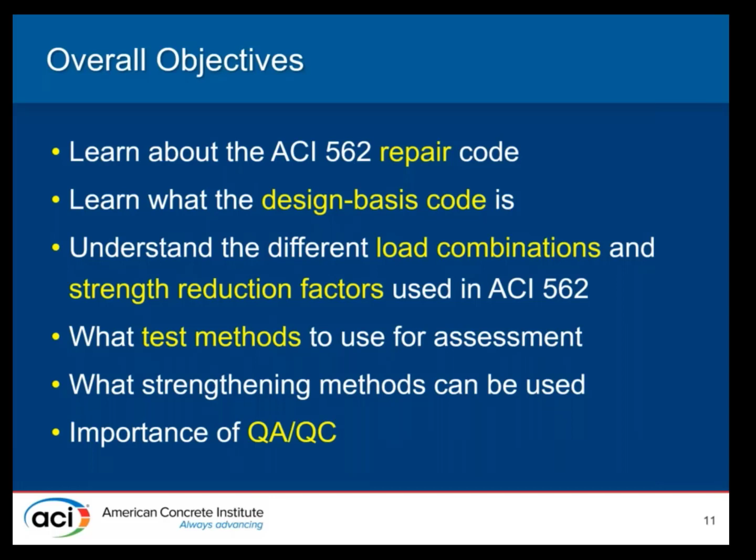As an overall outline, I'm going to focus a lot about the need for a concrete repair code, and talk about how concrete repair methods and different things are being used and what sort of successes we've had. Next, we'll talk about the chapters in ACI 562 and how they're put together. And finally, throughout the presentation, we'll have different examples of different types of repairs that are being completed.

We're going to talk about the history of repair codes - I know nobody was expecting a history lecture, but it's actually interesting how we came to this point. We'll talk about general requirements and some criteria when using those codes. And then, in some of the other modules, we'll talk about preliminary assessment, preliminary evaluation, when that needs to be performed, what material properties will be used during the assessment, what design strength equations and strength reduction factors apply when you're evaluating a structure, and then a key thing: how to ensure the durability of a repair.

We're repairing a structure because it's been a problem. So how do we prevent the problems from occurring in the future? And how do we not just ensure that the repairs are durable, but the repaired structure is durable? The last module goes through some real life examples, taken from the ACI ICRI guide, showing how some of these code requirements are put into practice.

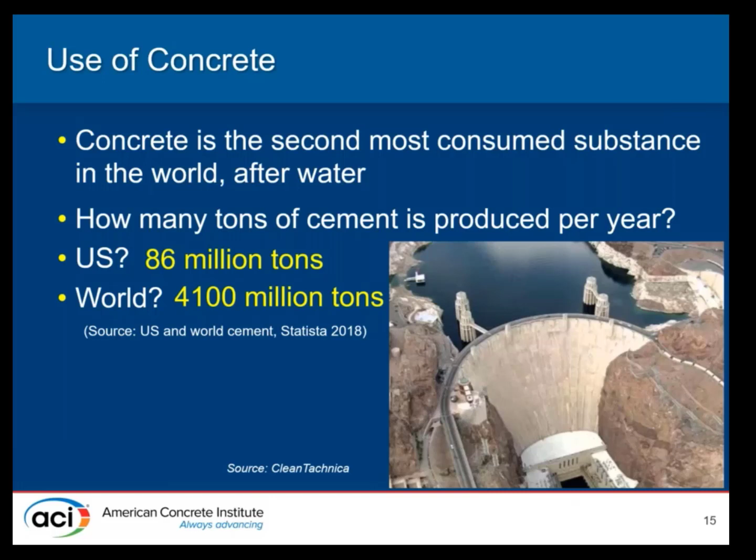How many tons of cement is produced every year? In the US, 86 million tons. That's just the cement. Worldwide, 4,100 million tons, and those are 2018 stats. Everything's gone up since then.

Give you an idea of how much concrete is being produced. And the nice thing about concrete, if we're careful with it, we maintain it, we keep it dry, we keep it happy, how long is it going to last? Thousands of years. And we go back to things like the Pantheon in Rome, some of the aqueducts in Rome. They've been around for thousands of years. There's not too many things that have lasted that long.

So what are advantages of using concrete? And this is like the really cool part when you're a little kid and you start to see that you can make all sorts of shapes out of it. It's fire, weather resistant, and it can be extremely durable.

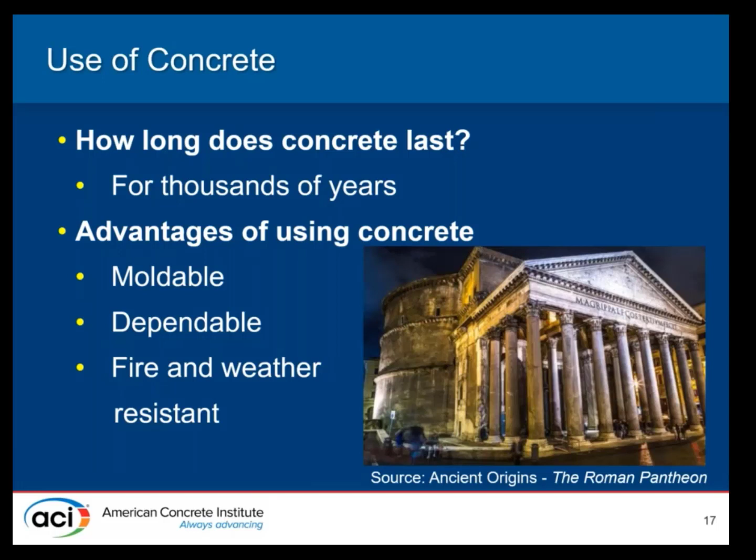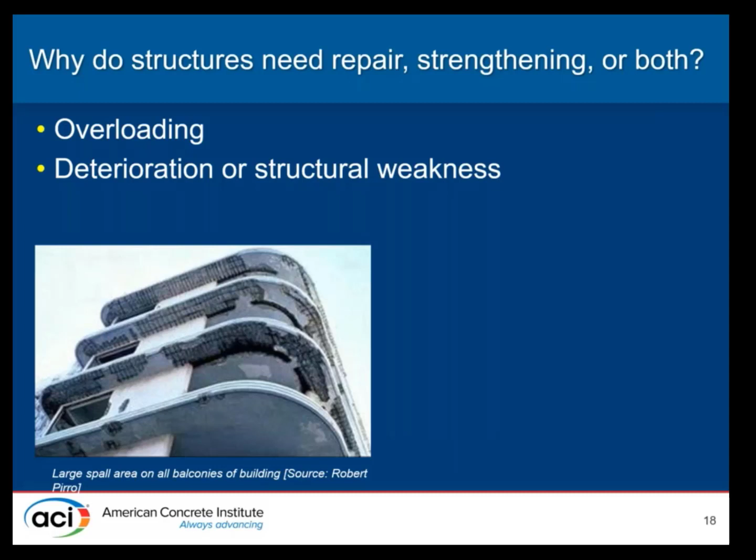You can have deterioration as a result of corrosion, other types of damage, inappropriate materials. You can have defects, inappropriate materials, bad choice of materials, not strong enough, design and construction errors. So repair or strengthening or both may be needed to come from a design error. Let's just say during construction, the contractor doesn't follow the specifications, or the specifications were incorrect. We got some of the wrong material. Maybe it wasn't sufficiently durable.

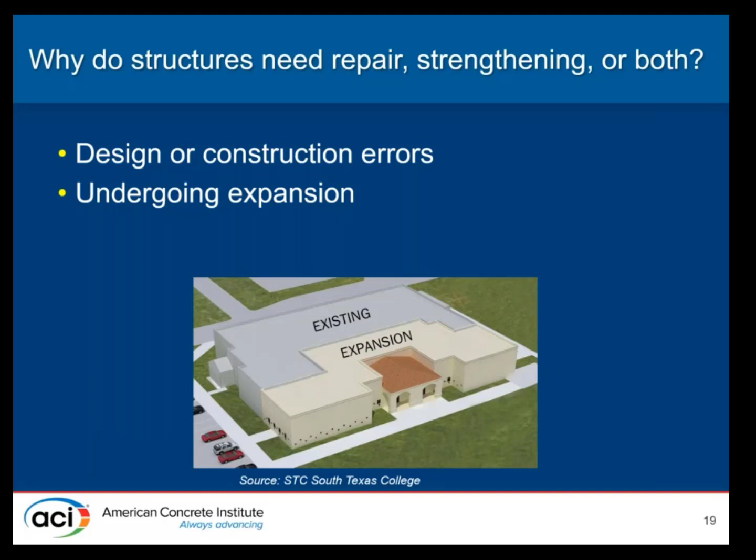We also may have to assess the capacity of a structure to accommodate larger loads or determine the feasibility of changing a structure. We have an existing structure, we want to expand it. There's new loads, new lateral forces, new gravity loads. And then finally, to evaluate structures from accidental effects, such as something that may occur from a fire or a flood, foundation settlement, overloads. So there are a lot of different reasons why we may need to evaluate an existing structure and then repair or strengthen it, or both.

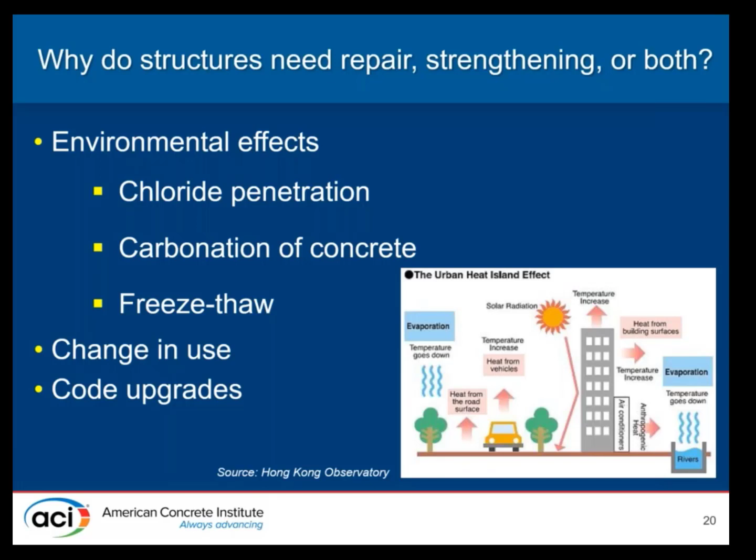Okay, the other situation we get into is the effect of the environment. Long term, we know chlorides can cause deterioration, that can cause corrosion damage. Change in use, code upgrades. We know in certain situations, due to certain conditions being identified, a building code will require existing structures to be strengthened, maybe for seismic reasons, maybe for change in use. We're going to put a new use in a structure. We're going to add classrooms to a residential structure. So those are all types of things that may cause a need for repair or strengthening or both.

And one of the important things to recognize, and this is difficult because most of us as undergraduates and graduate students, we learn about design of new structures. And there's actually very few people that take coursework in existing structures. And new structures, just like in class, there's a clear standard of practice. The owner, the design professional, they really just follow the code to create a new structure.

And it's for a building code official—if there's any building code officials in the presentation today—their job is, relatively, I'm not going to say it's simple, they have the hardest job of all, but to enforce the code. And the code itself for new construction is relatively clear. Now for an existing structure, and we'll get into this, what is the standard of practice? What should the code requirements be?

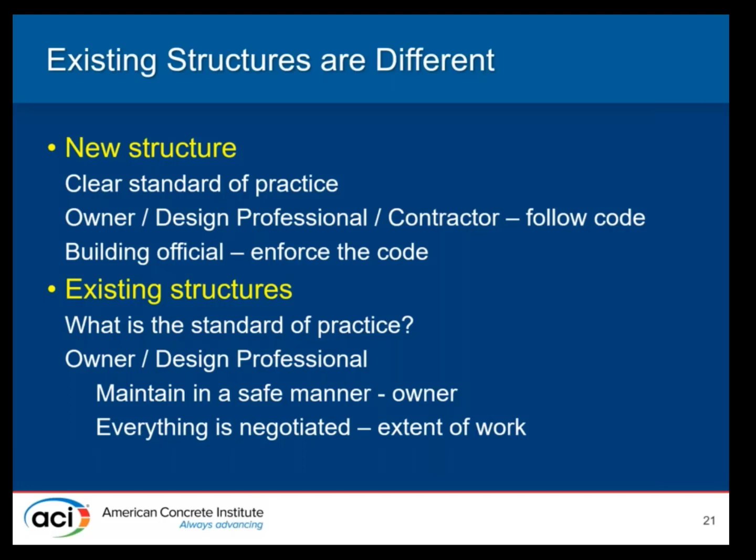For an owner or design professional, the owner has to always maintain the structure in a safe manner. That's pretty well established. But once we get into repairs, outside of some clear code guidance, the extent of work that's required is negotiated unless there's some clear requirements to do otherwise.

I mentioned standard of practice. This is a common term that's thrown about, and it really goes back to its origin in English common law, where it was established that the public has a right to reasonable care being exercised when we're charging people for services. If you go to get a haircut, you expect to get a good haircut. But it's really been established that the standard of practice is the degree of care that professionals under ordinary circumstances would use for similar projects. It's not the absolute best, it's not unreasonable—it's the ordinary care.

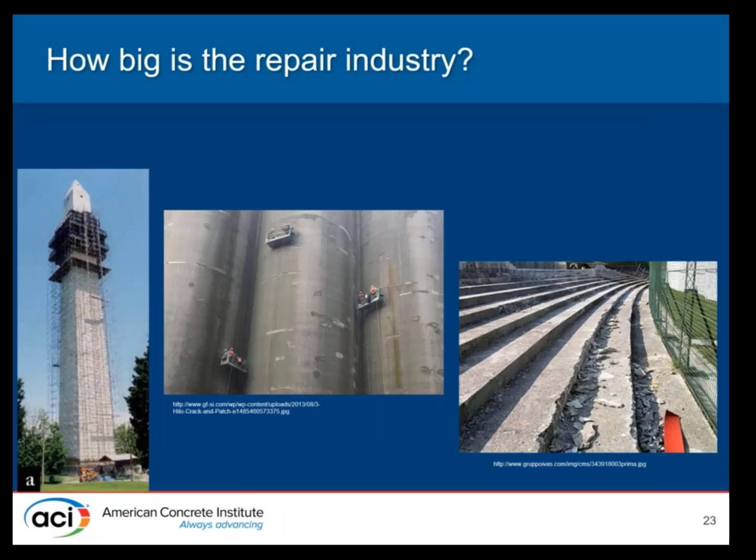So we start talking about the repair industry and how big it is. We talked about how big the concrete industry is, but the repair industry itself in the US—we're spending $18 to $21 billion, as estimated by the American Concrete Foundation, or $30 to $35 billion per year on concrete repairs of existing structures. You can see some of the projects, going from left to right: the Jefferson Davis Memorial in Kentucky, some silo repairs, and a deteriorated stadium—some of the types of projects people get involved with.

Some of the factors affecting concrete—why is concrete deteriorating? We know that new construction, if built properly, will typically take a relatively long time before it deteriorates. But what about a repaired structure? How long will a typical repair structure last?

To look at that, two different groups studied this situation: one was the US Army Corps of Engineers, the other was done in England by the Building Research Establishment, the BRE. These studies were performed over a period of 25 years and were published in the late 70s into the early 80s.

They studied the repairs on more than 200 structures, and what they found was that in the repaired structures, the cause of deterioration was evaluated and documented, and lots of different types of deterioration were observed—very commonly corrosion, freeze-thaw frost damage, excessive cracking, alkali-aggregate reactivity issues, just ordinary concrete deterioration, poor construction, and other factors.

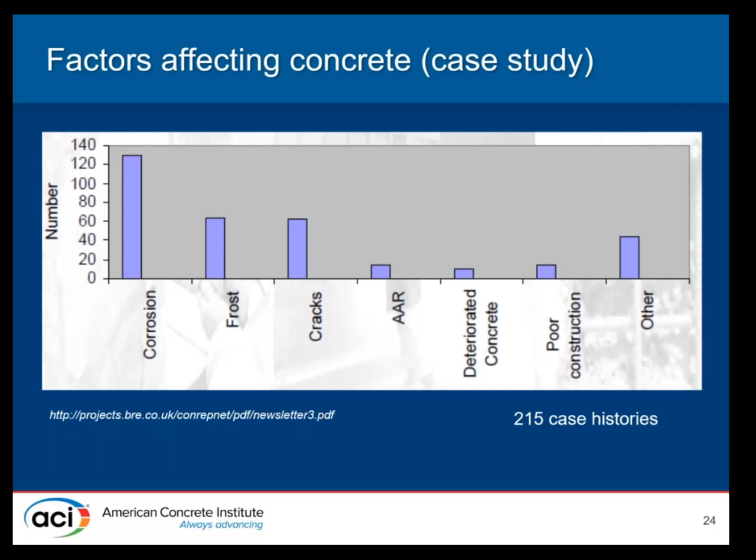So these were recorded in both studies. Deteriorated structures were repaired following the best practices at the time in the European study, performed by conventional methods and conventional approaches: simple surface repairs, coatings, crack injections—you can see the different types of surface repairs.

When they put the results all together, what they found was—these are results from the United Kingdom—most repairs, by the time you got to about 6 to 10 years of age, 70% of them had failed. About 20% only lasted less than 5 years. And very few repairs actually got to the point where 90% of them failed in the 11 to 25 year range.

So really, if we start thinking about these repairs, most of our repaired structures are actually deteriorating relatively quickly. So what are we spending money on? We're repairing a repair. Everybody knows that's one of the most frustrating things in the world, when you keep doing things wrong and you do it again and again. So this information really caused the repair industry to step back and start thinking about what we can do better.

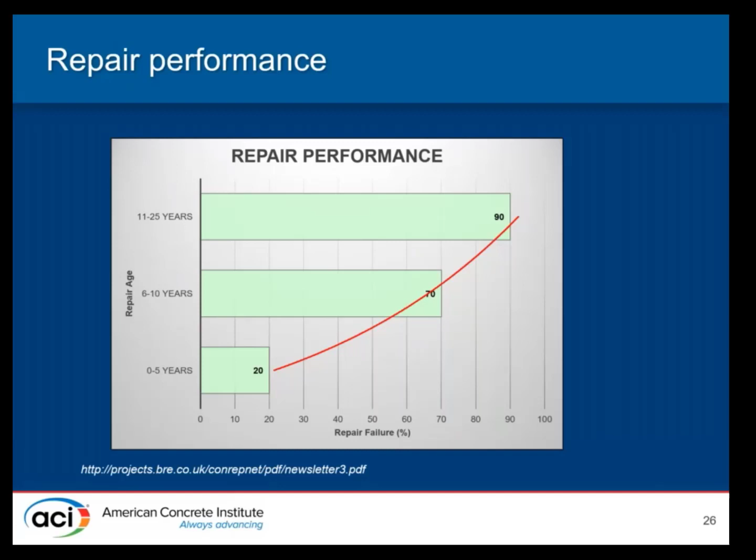And when they looked at what was the cause of the failed repairs, they found two main categories.

Engineering incorrect diagnoses—basically the engineer not recognizing the actual reason for the concrete deterioration. The repair design approach was faulty to start with. So if you start with a bad concept, you end up with a bad repair, and the shortcomings in the bad repair then manifest themselves separately or in combination.

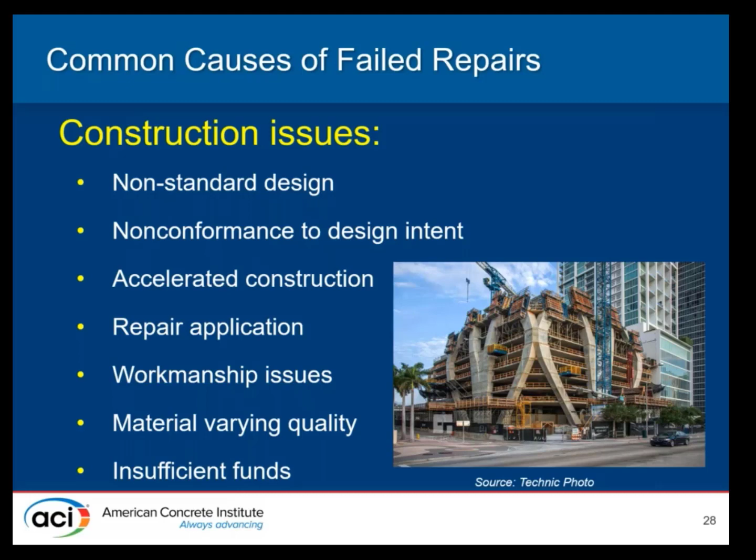There were inappropriate materials used to fix some of these structures. The next huge issue was construction issues: non-standard designs, non-conformance to design intent, accelerated construction where you sacrifice quality for speed, improper application where the contractor didn't follow the manufacturer's printed instructions. So the material was never installed properly and was doomed to failure. There was improper workmanship—the person executing the work didn't have proper training. Incorrect application of repair materials, local materials varying in quality, and finally insufficient funds where we just didn't put in enough money to actually get it done.

Stepping back, thinking about this as a module on repair history, ACI first published a concrete building code in 1910. I took a look back through the ACI database to find the first paper that addresses repair, and it was actually published in 1926 by B.C. Collier, titled Repair of Faulty Concrete Structures. It's 1.5 pages long, but the most interesting thing was the reasons cited for concrete failure.

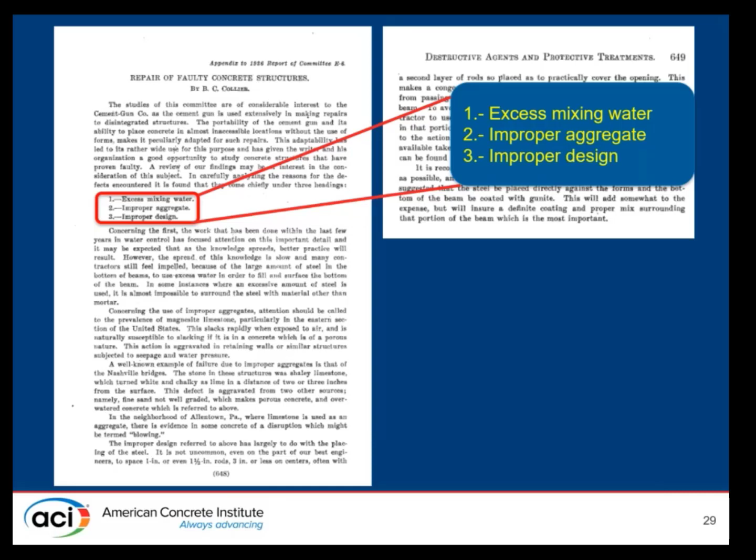They come under three headings: excess mixing water—too much water added to the concrete results in poor strength, we all know that; bad aggregate—the aggregate wasn't durable; and generally improper design of the structure itself. So from 1926, 87 years later, ACI published its first concrete repair code. We've been dealing with this issue of concrete repair for a long time.

So let's talk about how it's been addressed in some of the codes. The first building codes in the US: 1927 UBC, the Southern or Standard Building Code in 1946, and then BOCA, the Building Official Code Administrators Code, in 1950. Depending upon where you were in the country, you used one of these three codes.

The general concept in repair, and this is all pre-1980s—the repair philosophy was that if the anticipated value of the repair was less than 25% of the building, an in-kind repair was typically allowed. So basically, if there was a low cost to the repairs, just put it back the way it was. At 25 to 50% of the building value, unaffected portions of the building did not have to be upgraded to meet new construction rules, but the affected portions did. And finally, if it exceeded 50% of the building value, the building needed to be upgraded to new construction requirements.

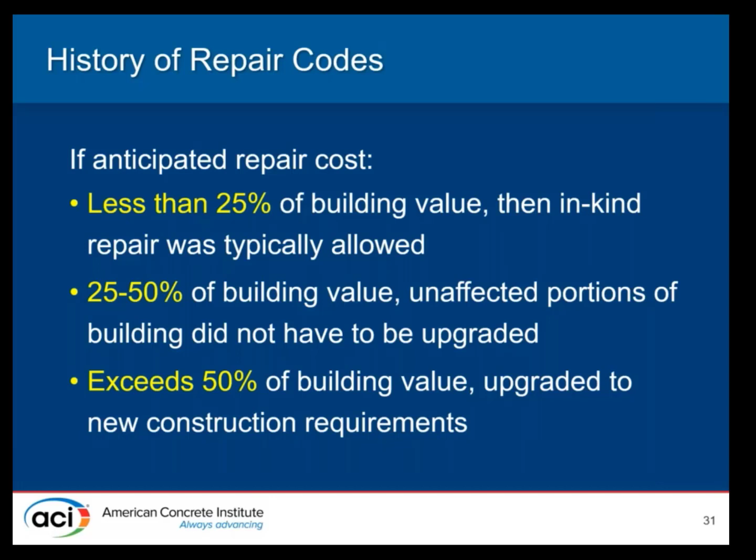So there are some obvious issues with this system: people gaming the system, adjusting costs to make sure they don't have to strengthen or upgrade to current code requirements. The other situation would be what time period that's being done in—is it 25% of the building value per year? So stretching out programs to adapt to different situations.

In the 1980s there was a change in philosophy, as these cost model methods were deemed an obstacle to the reuse of existing structures—that was discussed in a paper by Matera in 2006. So those cost triggers were basically pushed out of the building codes, and the philosophy changed to: leave undamaged, unaffected elements alone, and apply new construction requirements only to things that are actually damaged.

But then we started thinking, in this time frame, about the need for a material-specific repair code. Starting in the 80s, there's been a huge explosion in the concrete repair industry. A lot of what we're dealing with is the 1950s decision to have clean roads, so we had a lot more de-icing salts being used. All that de-icing salt tracked into parking structures caused damage. There have been a lot of improvements in repair materials, better design practices, installation, contracting, and QA. All these things have been floating around for the last 30 years, and it hints at a need for a material-specific repair code.

A couple of other things happened in the building code industry. In 1994, BOCA, the ICBO, and the SBCCI decided to create a single model code. They formed the International Code Council, which published its first building code in 2000. It took all three building codes and made one standard building code, which is a huge simplification in US practice if you're practicing in multiple states.

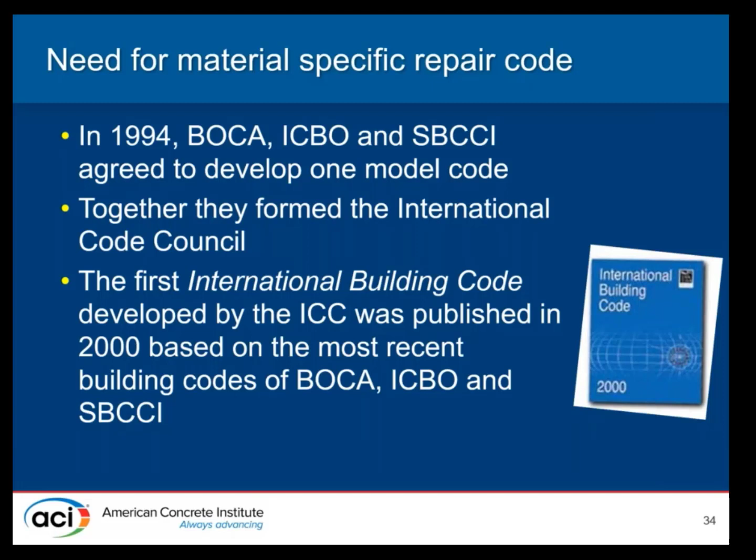They also created the International Existing Building Code, based upon the existing building code provisions in those three documents. The intent was to provide flexibility, permit alternative approaches to achieve compliance with minimal requirements to safeguard public health, safety, and welfare, insofar as they were affected by repair of existing structures.

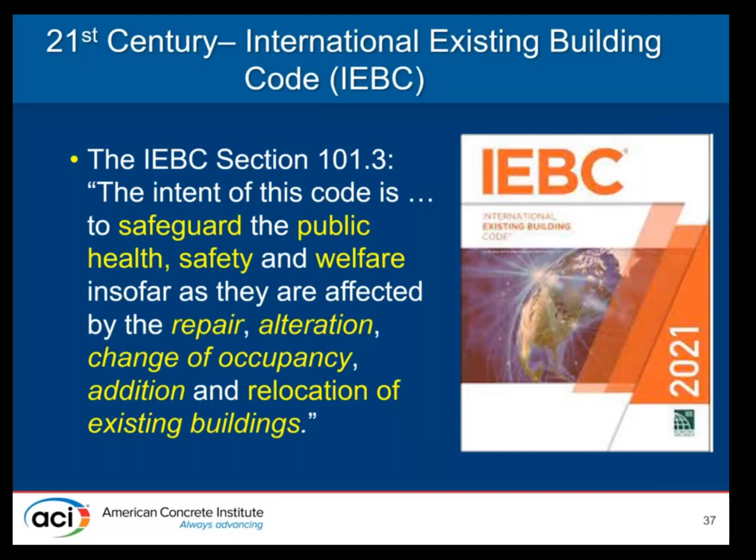So now we're in the 21st century, we have the International Existing Building Code. These are all called the I codes, and they reference other ACI codes and standards, which then get referenced in the IBC, ASTM, and other standards, all now tied into the I codes. What we're focused on in the repair industry is the IEBC, whose intent is to safeguard public health, safety, and welfare insofar as they're affected by repair, alteration, additions, and change of occupancy of existing buildings.

Those are the topics addressed in the IEBC. There are a couple different methods you can use, and there are also provisions for relocated and historic buildings. The intent of the ICC is to create a complete building safety system.

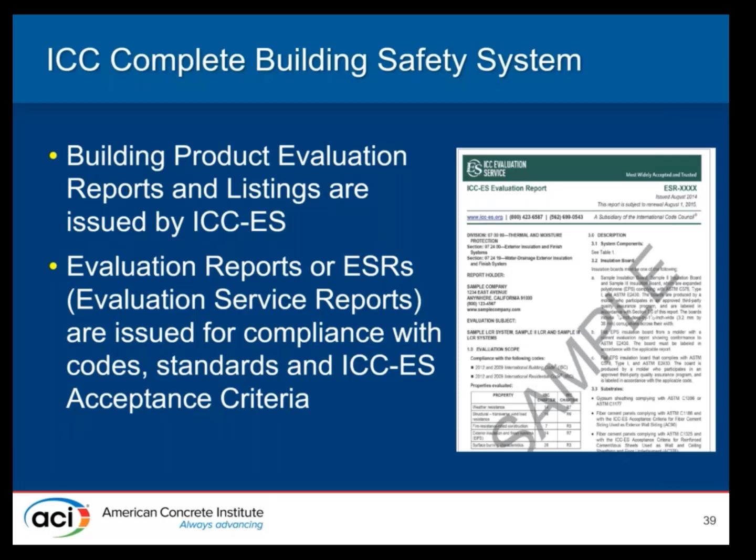One of the things the ICC does is the ICC Evaluation Service, which is intended to provide a pathway for new products to be used. New construction materials, like FRP, have been tested through the ICC Evaluation Service. Those are things that have been tested but until recently had not been part of codes like ACI 318 or ACI 562. So it provides a pathway for some new materials to get into the building codes.

So stepping back, with all those changes in the building code, why do we need a concrete-specific, material-specific repair code? It comes down to this: when we look at the IEBC, it has very specific guidelines, but it's not specific with respect to material performance or how to assess or strengthen these things. So what we want to do is create a uniform set of requirements for repair of concrete structures, with consistent methods to decide governing code and consistent methods of assessing damage, while maintaining flexibility in repair solutions.

So with ACI 562, one of the things we did was really integrate a lot of performance-based and some prescriptive methods. One thing we clearly did not want to do was eliminate or take away the design professional's flexibility in repairing structures. We wanted to keep that as much as possible, while still making this a performance-based document.

So now, as we start into Module 2, we'll talk about the general requirements of ACI 562 and take us through the concept of preliminary evaluation that's present in ACI 562.

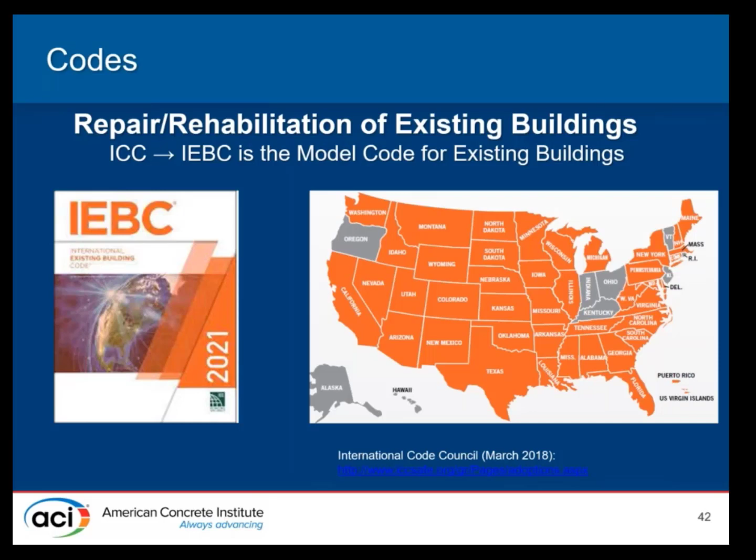So the IEBC provides the minimum legal requirements for existing structures. But a limitation is that there's nothing material specific, nothing concrete specific in the IEBC. So one of the critical things we've been working on at ACI was to get the IEBC to reference ACI 562, to bring it in.

In the 2024 edition, it will reference it, saying repair of structural concrete shall be permitted to comply with ACI 562 section 1.7, except where some other things happen. Section 1.7 is the section of ACI 562 that specifically describes how you will use ACI 562 when working with an existing building code. Section 1.8 is appropriate when there is no existing building code.

So ACI 562 as a repair code can either supplement the IEBC or function as a standalone code. Why a standalone code? We're typically talking about building structures, but there are a lot of building-like structures—industrial facilities, piers, wharves, large silos—that aren't typically considered building structures, but the provisions of ACI 562 will still work for repairing that type of structure. So you can use ACI 562 with the IEBC, with a local existing building code, or as a standalone code.

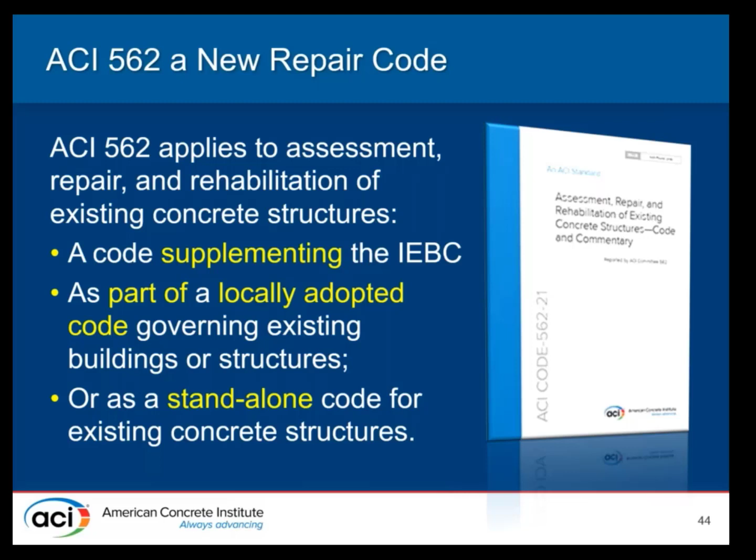So talking about general requirements, even when there is no existing building code, what is ACI 562? It provides a standard, something that supports a standard of practice, and it still serves as a tool for an owner and the licensed design professional. When should an owner be looking for professional help? When a structure, or a portion of a structure, has damage, inconsistent behavior, structural deficiency, or deterioration.

Those are situations when the owner may want to seek out a design professional for repair. And if the repair is being done in accordance with the standard, that's certainly going to help us when we go to get approval of the repair plans from the building code official.

So when is ACI 562 applicable? It's really intended for buildings that are actually complete and hold a legal certificate of occupancy. If the building's not complete or it doesn't have a legal certificate of occupancy, you really should be using the provisions of ACI 318. That's the new building code.

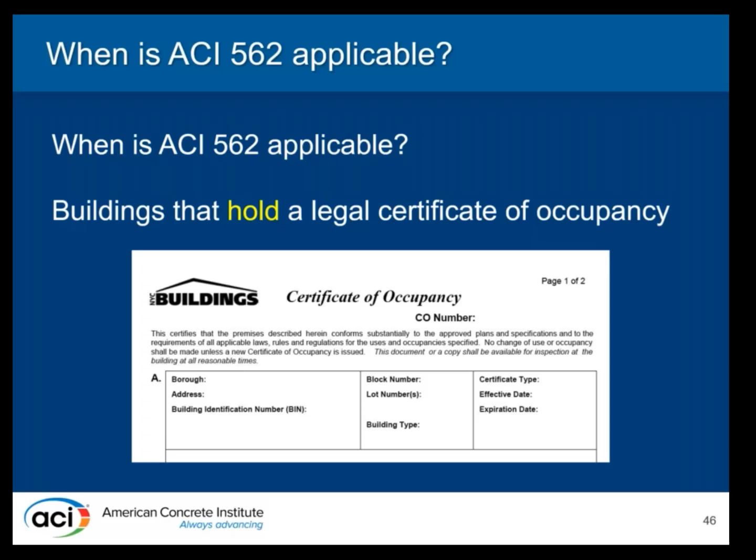So what type of code is it? I mentioned earlier, it's performance and prescriptive. New design codes are predominantly prescriptive. Repair codes are a little bit of a different animal. You've got to have some performance-based requirements, and that's to give us that flexibility that we talked about. So it provides minimum material and design requirements for evaluation, repair, and rehabilitation of existing structural concrete, and it provides minimum life safety and performance for repaired concrete buildings.

So it's providing these minimum requirements. So what is it doing? It helps standardize industry practice, and that's critical. Until recently, engineers and contractors undertaking this type of work did so without the standard, without the benefit of a concrete repair standard. As a result, practices and materials varied. Therefore, an overall aim of the concrete repair code is to produce a document that provides a uniform set of requirements that is flexible and addresses overall repair issues.

The LDP for the project is responsible for assessing the structures, from all the services from assessing the structures to specifying repair materials, developing details, producing quality assurance programs covering repairs, and advising the owner on future maintenance requirements to maintain a durable structure.

One of the things that's been an obstacle in some situations is building inspectors and building officials sometimes insisting upon and holding engineers to standards for new construction for repair projects, which is inappropriate. And that led to some costly, unnecessary repairs or even demolition in lieu of rehabilitation. So we wanted to provide a document that you can show to a building code official and say, this is the standard we're using.

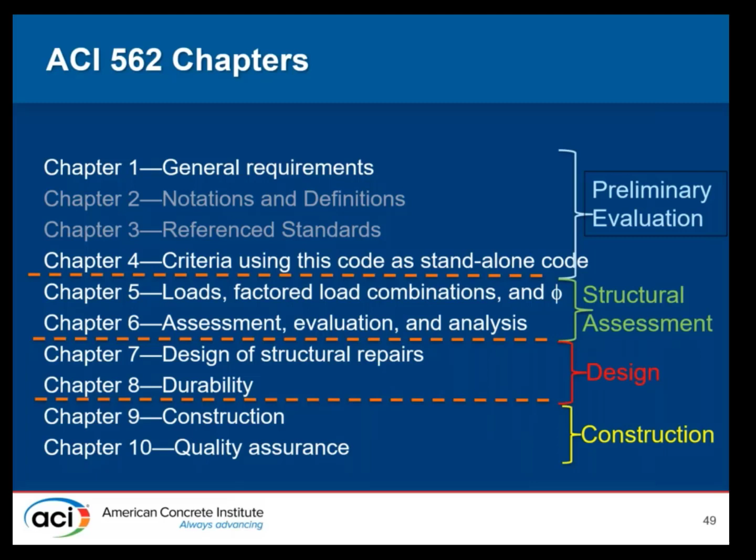Some of the critical definitions I'm going to go through in the next slide. These are from the ACI 562 code, and they're also available on the ACI website. Assessment criteria are the codes or standards that you use in the evaluation. Rehabilitation is a process to get a structure back to a desired useful condition.

Repair is reconstruction or renewal of concrete parts for the purpose of maintenance or to correct deterioration, damage, or faulty construction. One of the most important things we did in the repair code was to define what it means to have damage. Damage refers to a decrease in strength as a result of events. Deterioration is basically structures actually deteriorating or losing components, or freeze-thaw damage causing deterioration. And then faulty construction is when a concrete structure, due to design or construction errors, does not have sufficient strength or durability. So those are all definitions provided to give a consistent language framework for using ACI 562.

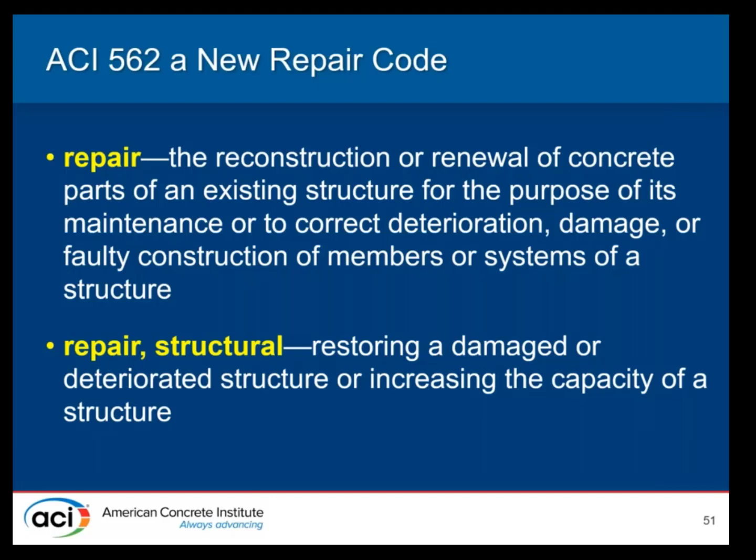Now, structural repairs are a little bit more specific. Those are restoring a damaged or deteriorated structure, or increasing the capacity of the structure. We're actually adding back strength that got lost. Retrofit in ACI 562 is really intended as a modification of an existing member, system, or structure to increase the strength, stiffness, or ductility to address seismic performance. We're really focusing on keeping retrofit associated with seismic, and then strengthening is obviously increasing the load resistance capacity.

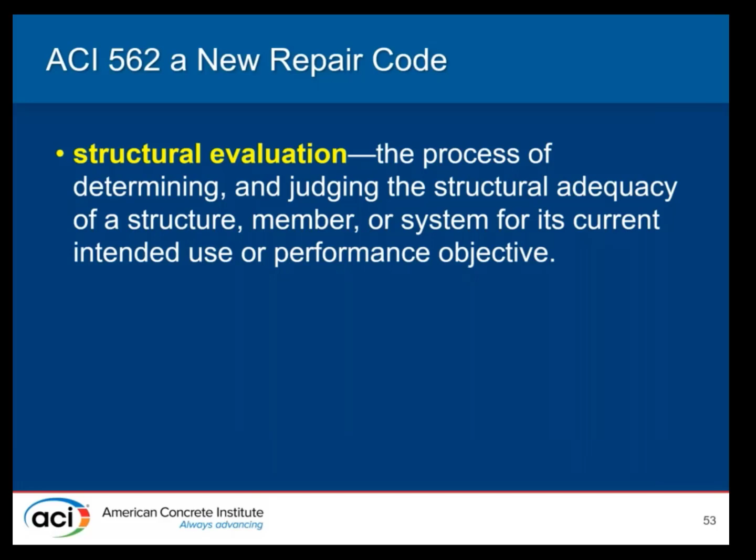Structural evaluation, as you would expect, is determining and confirming that the current structure has sufficient capacity for current use. And assessment is the overall process for going through, evaluating the structure, and then determining the path forward.

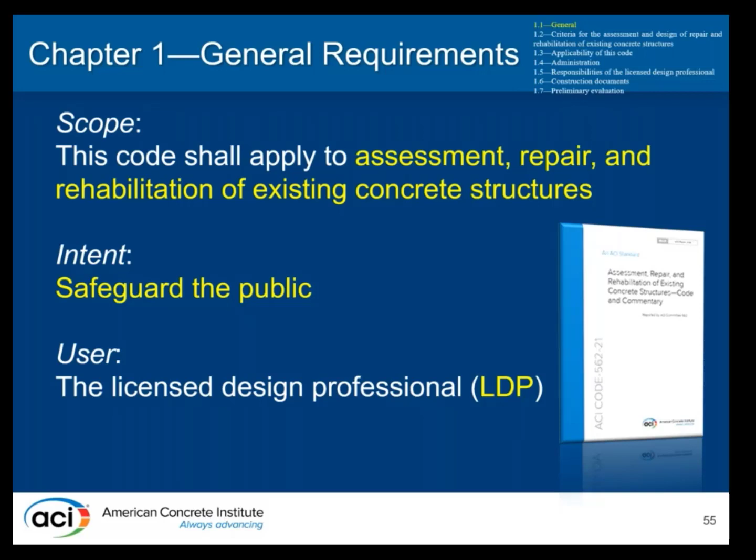Going through chapter 1, code section 1.2, which is the scope: the code applies to assessment, repair, and rehabilitation of existing structures as a code supplementing the IEBC as part of the locally adopted governing building code, governing existing buildings or structures, or as a standalone code. The intent is to safeguard the public, providing minimum structural requirements for existing structural concrete members and systems. The user, as with all building codes, is intended to be the LDP, the licensed design professional—the critical person who actually understands how the code works.

Applicability—we already talked about building structures, so existing concrete structures, but also non-building structures when required by an owner or a building code official. Note that we actually took 'the building official' out—it was removed in ACI 562-21.

Section 1.3.1 is applicable for assessment, evaluation, and repair of existing structural components and non-building structures when appropriate. It applies to foundations constructed of plain or reinforced concrete, including but not limited to typical types of footings: spread footings, mat footings, piers, pile caps, caissons, embedded piles. The design and installation of new pilings fully embedded in ground are regulated by the current building code. For repair of existing foundation members, the provisions of ACI 562 apply if not in conflict with the existing building code. For portions of concrete piling in air, water, or soil not capable of providing adequate lateral restraint through the piling to prevent buckling, the provisions of ACI 562 would apply.

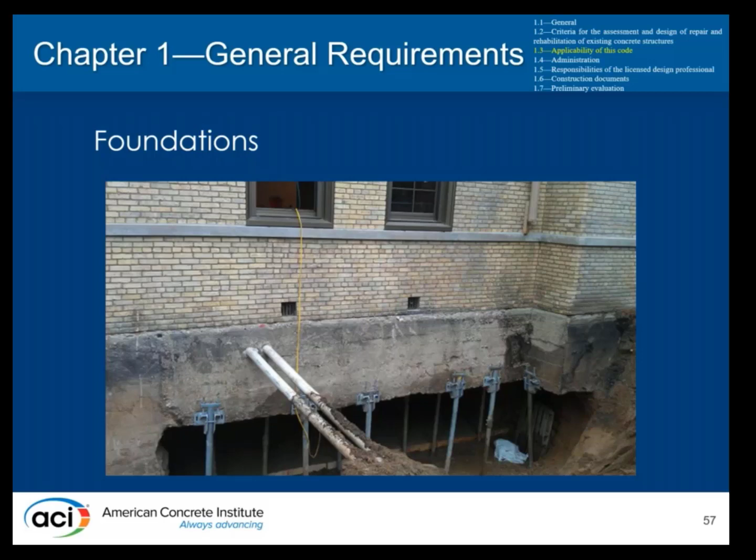So it applies to your foundations, applies to structural slabs supported on soils—not a slab on grade, but a structural slab supported on soil—and the concrete portions of composite members. So when you have a concrete member and a steel frame, ACI 562 applies to the concrete portions. It also applies to prestressed and precast concrete, and both building and non-building structures, so marine structures, tanks, silos.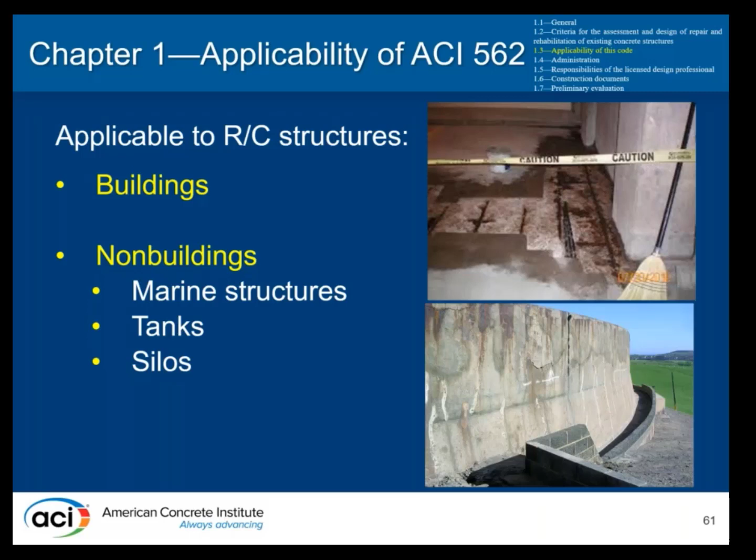What's it not applicable to? Non-structural concrete and aesthetic improvements. It's not intended for repair of non-structural concrete or aesthetic improvements, except—and this is a very important exception—if the failure of the repair creates an unsafe condition. One of the things we're trying to do is prevent unsafe conditions. So if you're doing something like an overhead beam repair, and the failure of that repair would result in a piece of loose concrete, ACI 562 applies. Same thing on a facade repair. But if you're just applying a coating to change the look of a building, you don't need ACI 562 for that.

Evaluation of seismic resistance and design shall be in accordance with the governing building code for seismic evaluation, if there is one. If not, you can use ASCE 41. ACI 562 was not developed for seismic evaluation—there's a very specific ASCE 41 that's been developed for that. ASCE 41 references ACI 369. Those two documents were really specifically developed for seismic evaluation, and ACI 562 defers to them for that purpose.

So let's step back. When should an owner start to seek professional help? Professional help for a structure, not for any other issues. When a structure, or a portion of it, starts to exhibit signs of inconsistent behavior that's not expected or consistent with the design, construction requirements at the time of construction—deficiencies, deterioration. If you take a look at the picture, you can see the sag in that girder from being overloaded for a long period of time. That sort of inconsistent behavior, maybe excessive cracking—those are all things that point to the need for an owner to get an LDP involved. Evidence of structural deficiency or deterioration, where you start to see overhead damage, you start to feel unsafe in the structure—those are all indications as to when an owner should start to get a licensed design professional involved.

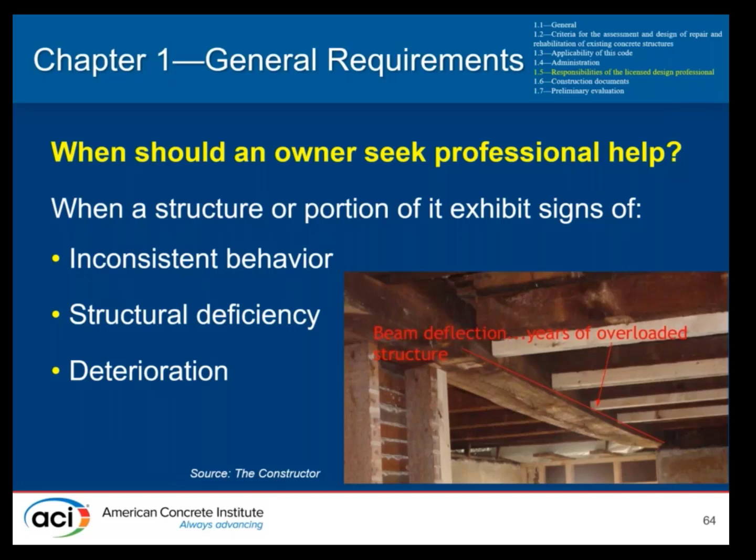So what is the LDP's responsibility? At the start of a project, the LDP really has a lot of questions. The most important one when we're talking about the assessment is: are there any immediate unsafe conditions, and does the structure need repair? What codes apply? What code was it built to? Does it need to satisfy current building code requirements? What loads should the LDP use, and what strength reduction factors are appropriate? If you think about different types of structures, a lot of parking structures many years ago were designed for 75 pounds per square foot.

Current building code would allow 50 or 40 pounds per square foot. If you're in Colorado, maybe your snow loads compared to your original construction versus current have gone up significantly or changed significantly. So what load should that design professional be using, and what strength reduction factors?

What evaluation and analysis methods? How good are we able to determine the damage? How well can we analyze it, and what's it all mean? And then, to what level should something be strengthened?

Was the original design appropriate? Was the original design not appropriate? Or maybe there's a situation where something was designed for excess loads.

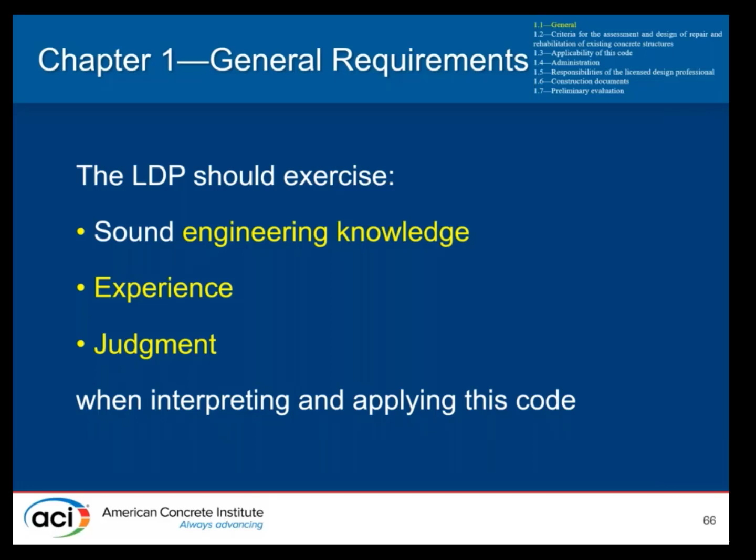Is some sort of temporary shoring necessary? These are the sort of things that are necessary when applying and interpreting the ACI 562 code. Start to think about new systems, design, and construction methods.

So any repair, rehabilitation, or remedial construction system which does not conform to the code, but has been shown to be adequate by successful use, analysis, or testing, the design professional can try to use that and bring it to the jurisdictional authority. So what are we talking about?

For many years, things like FRP materials had not been fully integrated into the ACI codes. Many design professionals recognized that those were good materials that were available, and they needed special procedures to get those to be used. We're starting to see things like 3D printing that have not been generally recognized into the building codes yet. Can those be used in repair as a new technique?

ACI 562 does have provisions that are consistent with the ICC provisions, allowing a board of examiners or a jurisdictional authority to review those materials. That's also where the ICC ES reports come into play. So those materials can be potentially used and save your clients some money.

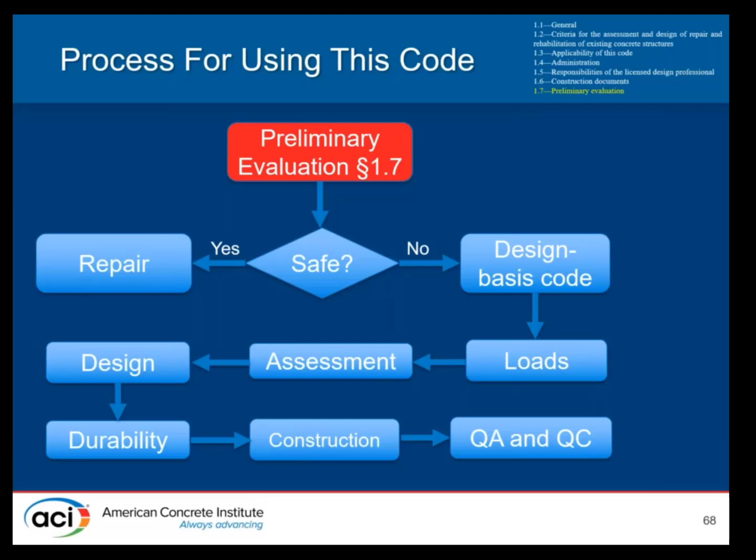So the process for using ACI 562 really starts with section 1.7, this preliminary evaluation. Then, depending upon the results of that preliminary evaluation, we'll start with chapter 4, and if necessary, go into a more detailed evaluation, which is addressed in chapter 6.

The preliminary evaluation is not intended to be a comprehensive study. Preliminary evaluations are by nature preliminary, they're general in nature. They may not be comprehensive enough to achieve the necessary objective, and you may need to do more work later. But they are intended as the first step to determine what's going on with the structure and how much we know about it.

So it's carried out to develop an initial understanding of the concrete structure's behavior and existing performance. In other words, is it safe? Does the structure need further assessment? And is it in general compliance with the original building code?

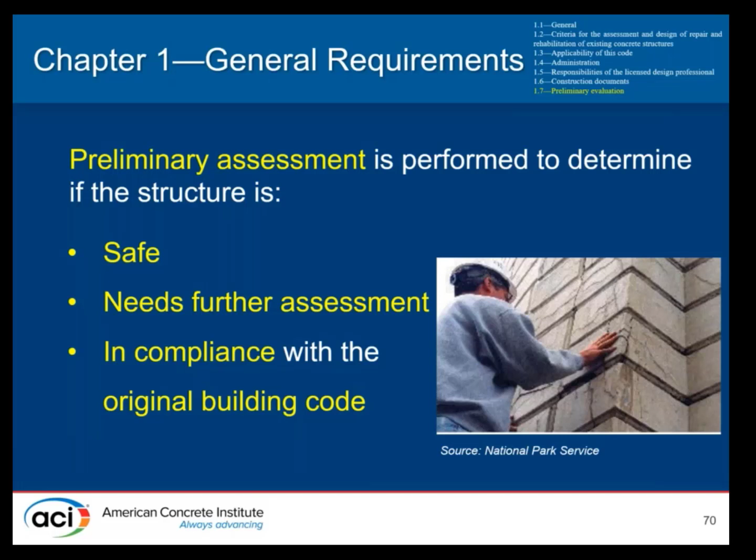A lot of these questions that come up with respect to preliminary assessment have to deal with the extent of documents that are available. What do we know about this? Looking at the picture on the right, you're starting to see some spalled concrete. That's creating, in my mind, concern about safety. The extent of documents, do we have any information? Do we have any documents at all?

So really preliminary evaluation consists of getting familiar with the original building code the structure was built under, reviewing any existing plans, specifications, testing reports, and other existing documents related to the project. We're talking about visiting the structure with the plans to verify the existing structural plans match—a lot of times they don't—marking what may have changed, what type of previous repairs were done, and maybe doing some simple calculations to assess material properties.

The other thing that's always critical to me is what type of damage are you dealing with? Am I dealing with a precast parking garage with damaged, worn out sealant joints between double T members and possibly some camber clips? Or am I dealing with a multi-story post-tension building that has significant damage to the post-tensioning system? There are all types of different structures out there, and what I can say about certain things from a visual inspection, I certainly cannot say about others.

So the objective of reviewing existing documents is to collect information. At this point we're not doing a comprehensive study—we're trying to evaluate the existing information about the structure within the work area, confining it to that area, and making an initial determination of its adequacy to withstand in-place environmental conditions and design loads. We're collecting information on the design, materials, how it was built, and service history, and making note of what information is missing or not available.

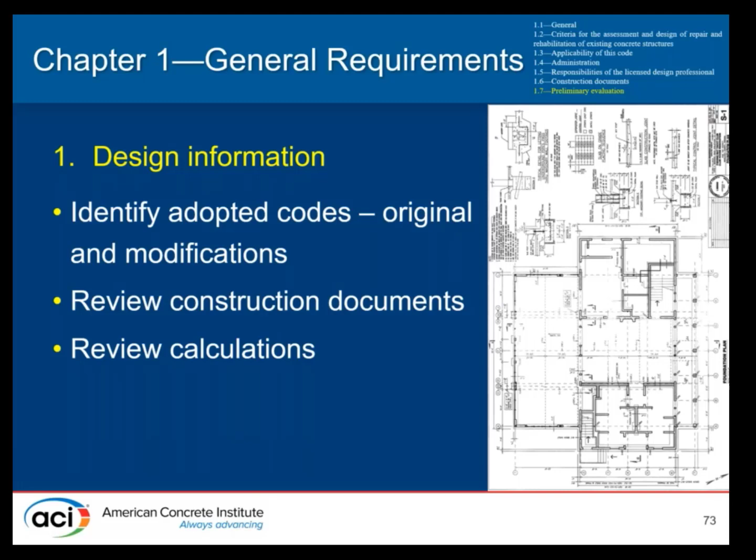Some design information—original codes that may have been used, available construction documents, shop drawings, placement drawings for reinforcement—other things you can get into include textbooks at the time of construction and copies of old building codes. All of this information can be used as part of your preliminary evaluation or your comprehensive evaluation.

When it's available, we can look at certain types of materials information—concrete test reports from initial construction, submittals, concrete mixture proportions that may be available from batch tickets, mill reports from the cement or reinforcing steel, and protection systems. That's some of the material that may be available.

Getting more into it, various original construction documents may have been retained, and they're very helpful in learning about the construction methods, materials, and problems encountered.

So things we may be looking for include correspondence between members of the design team, results of tests on the concrete from initial construction, quality control data, and diaries kept by the construction team—that's a little unusual to find. It's always helpful to have job progress pictures, as-built drawings, survey notes, and records. All types of information may be available if you ask the right questions and are willing to search for it.

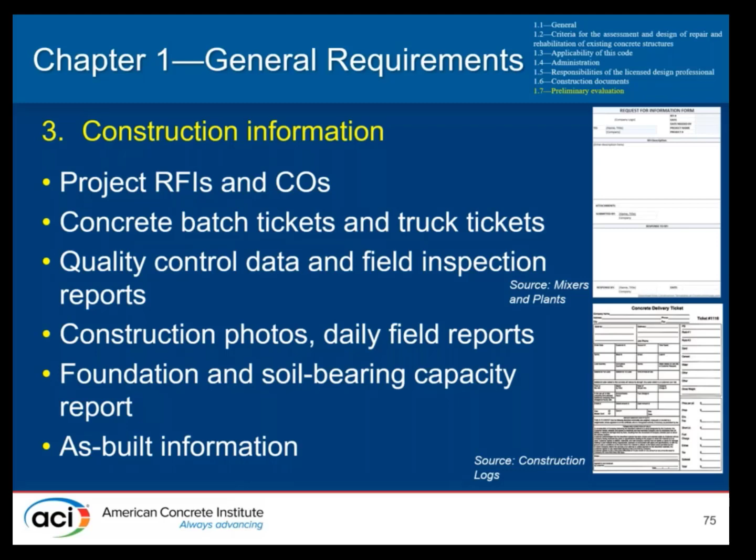Information regarding the foundation—soil bearing capacities, geotechnical reports, allowable bearing capacities, location of the water table during construction—all of this information can be used to help us make a decision about the structure.

And then finally, critical documents that relate to the structure's service history should be reviewed to learn as much as possible about the maintenance, previous repairs, and any previous work. So if possible, records from former owners, current owners, reports from prior consultants, and reports maintained by owners of adjacent structures. Talk to the operations manager, the building manager, and maintenance personnel.

Depending upon the area that you're in, you may want to review the seismic or geological activity, insurance reports, and records of damage to the structure from fire, wind, or snow. All this information may be available for review.

And then obviously you're going to flavor all of this information with your own personal experience with similar structures in the geographic area—understanding the age of the structure, its environment, how it was placed, and what type of materials were used at the time of construction.

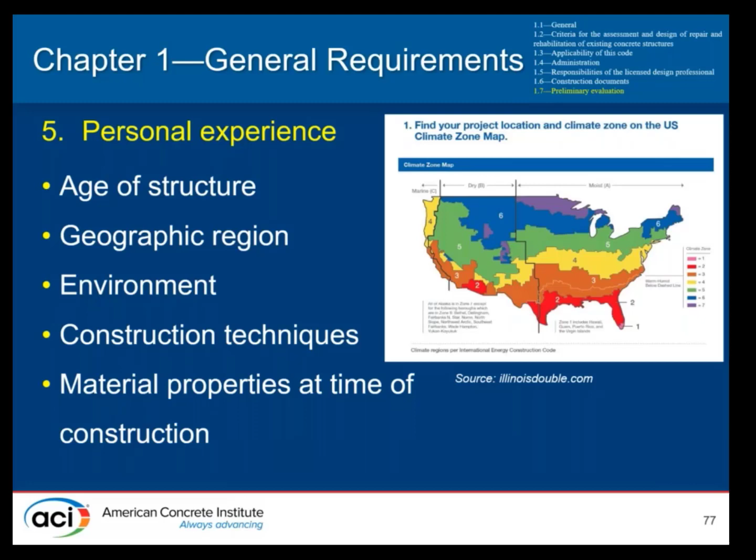And finally, one of the other critical things for historic structures—some of the information sources you can get include the Library of Congress, National Register of Historic Places, State Preservation Societies. All these other sources are available and may have useful information about the service history of the structure.

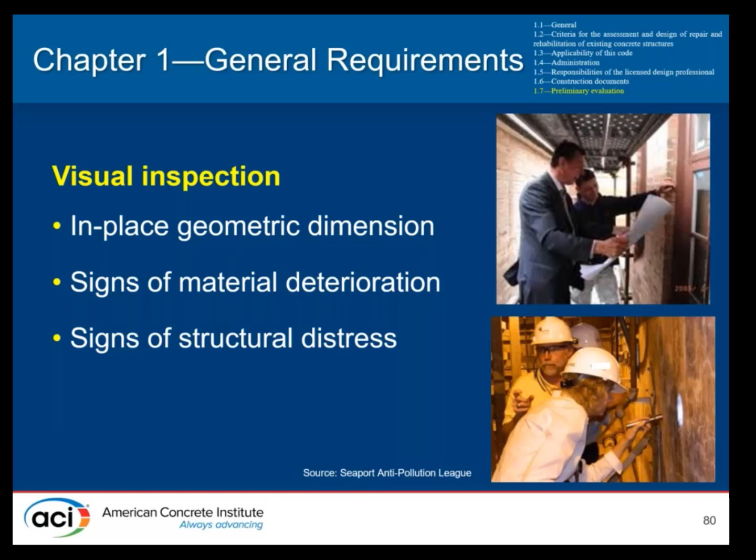Then, as we keep going through our preliminary assessment process, we'll get into a visual inspection. We're going to visit the structure and actually determine if our plans and the actual structure match—checking in-place geometry, looking for signs of material deterioration and distress, some of the things we may actually see.

Excessive deflections, what does that mean? Typically, there are certain amounts of deflection that are visible to the eye, and a lot of times something will pop out that just doesn't look right. That's really what we're terming an excessive deflection.

Evidence of water infiltration is a big problem. Atypical cracking problems: as most of us know, all concrete structures crack, so is the cracking you're seeing consistent with what you'd expect for similar structures, or is it atypical? And then things like vibrations—if you're working in a parking structure and a car drives through, is the structure moving? Can you feel it move? Does it feel like it's moving too much? All that information is part of our assessment of the structure.

Our preliminary findings and preliminary judgment are based upon personal experience. What we're trying to determine is information about the condition of the structure—is there faulty construction and what's the extent of deterioration? We're trying to find out if unsafe structural conditions are present, perhaps as bad as substantial structural damage, or if there's any faulty construction. A lot of what we're doing is determining the need for future measures at the structure, whether they're immediate, and what type of repairs are needed.

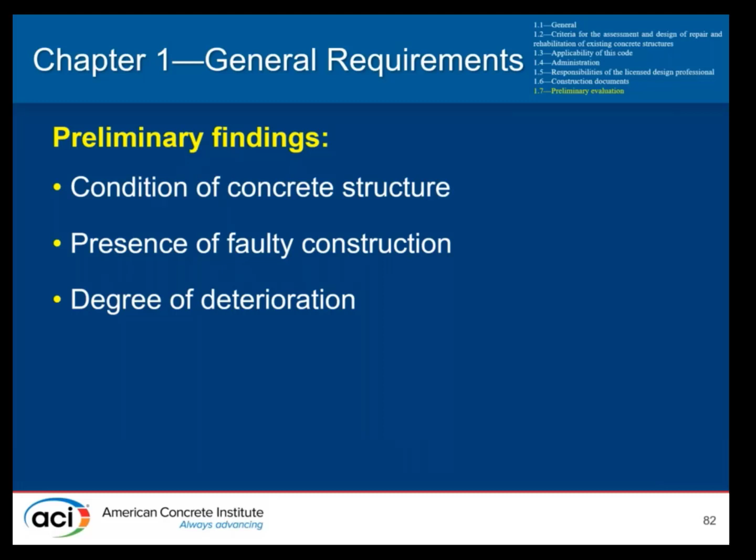If we are finding faulty construction or unsafe conditions, there's maybe a need to report some of these conditions. That's discussed in ACI 562.

Then our preliminary analysis: depending upon what we're seeing, if it indicates severe distress, we should contact our owner immediately to identify where some shoring may be needed. Maybe we need to stabilize some areas, or limit access to certain areas to get rid of the unsafe conditions.

Now, substantial structural damage refers to damage in a structure that's resulted in a significant decrease—typically more than one-third—in the gravity or lateral load resistance of the structure. Typically, we're not going to be able to determine that from a preliminary evaluation, but it's really the first necessary step that we're going to be going down that path.

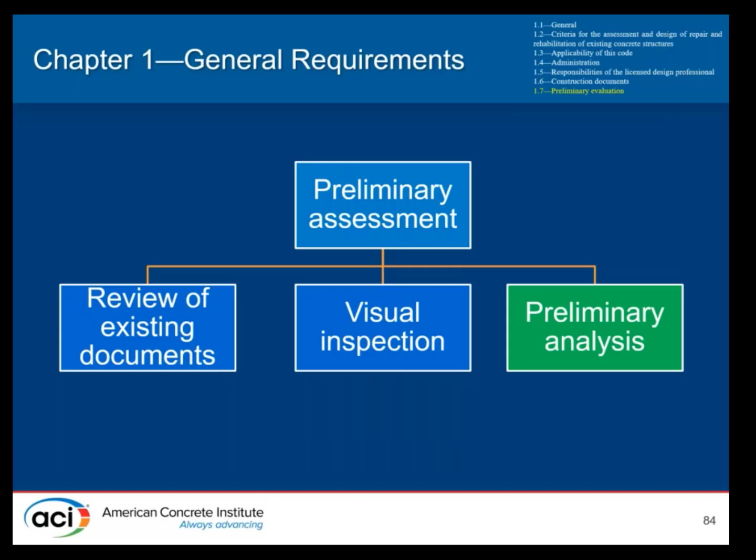So a lot of that information we gathered, we're going to be using to start making some decisions about the structure. How are we going to do that initial preliminary analysis? Maybe doing some simple calculations based upon either records from available materials testing or historic data, which is presented in Chapter 6.

Now, the preliminary analysis: when material test results are unavailable, what we can do is use historic properties based upon typical values from the time of construction. Those are typically conservative, and those are shown in Chapter 6 of ACI 562.

Our focus really should be on determining the critical gravity load resisting members, such as columns and walls, followed by assessment of the lateral resisting system. If we have material properties available, we can use that; if not, we can use historic values. And always in these calculations, we're trying to consider the in-place geometry and any observed deterioration.

So for the purpose of our preliminary evaluation, what are we going to use for a code? We can use the original code, the current building code, or one of the assessment criteria presented in Chapter 4 of ACI 562. As you get into the presentation tomorrow, you get a lot more details on the assessment criteria in Chapter 4.

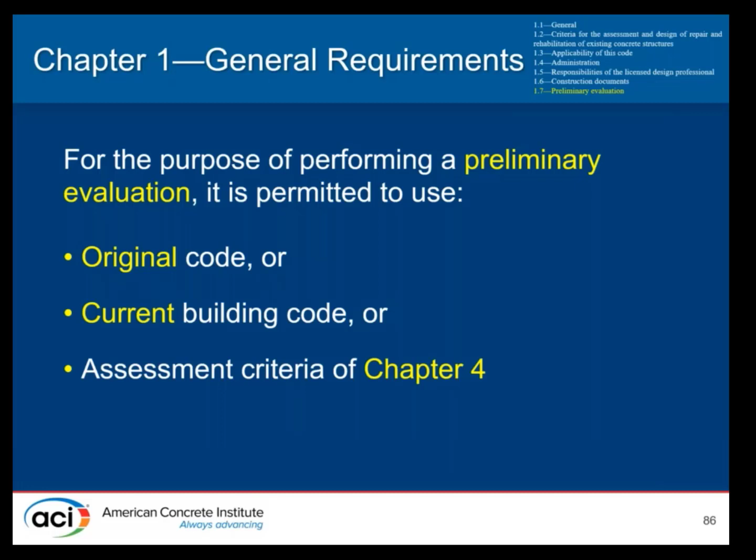So what happens—what do we do when the preliminary evaluation and preliminary analysis reveals unsafe structural conditions? If we do find unsafe structural conditions, they can vary in severity and vary in significance.

The code of ACI 562, section 1.5.2, tells you as a design professional to report unsafe structural conditions in the work area to the appropriate authorities, with the recommendation that they immediately alert the contractor or owner to do something to make these unsafe conditions safe.

What can that mean? Well, let's say we see loose concrete on the facade of a building or on the soffit—that loose concrete can be removed. We could close the area where that loose concrete is present, so there's no pedestrian or vehicle exposure. Or we may find something worse—that the structure needs, in our opinion as a design professional, some type of shoring. So we need to make that recommendation to the owner, and in some situations we'd be reporting that to other appropriate authorities, depending on the requirements of the municipality you're in. We're addressing those unsafe conditions as soon as possible.

But the more common outcome is that our preliminary analysis will indicate a structure is adequate if maintained properly. There's a couple different iterations here—adequate, but it's going to need some work in the future, so there's going to be some effort to prevent continued deterioration.

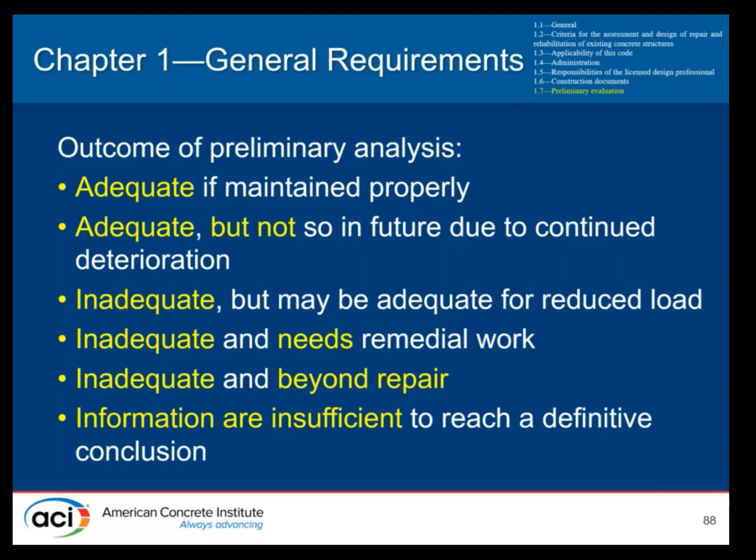So when required by our contract, we'll provide the owner with a report documenting the materials that are shown, the original building codes, the project documents that were reviewed, any prior repairs, locations of damage, any recordings of actual member cross sections and deviation from expected tolerances that we see. This is when required by the contract that the design professional has with the owner.

A couple important things. Typically, a visual inspection alone is not sufficient to assess corrosion and whether or not reinforcing steel is corroded. Yes, you can see spalling, you can see corrosion damage on bars, but you really can't tell anything about the steel that's not present on the surface or where no damage has occurred yet.

Similarly, you can't tell much about things like post-tension structures where the post-tensioning tendon is protected by a sheathing. However, the visual inspection is a good method for initial assessment when the design professional has experience and uses sound judgment. So let's move into talk some more about concrete distress.

For the next closing portion of the presentation today, we're going to be talking about the distress of concrete structures and some of the things that cause concrete distress, why concrete's cracking. These are the things that we'll be looking at when we're actually evaluating existing structures and trying to understand the next step. So some of the deterioration that may be documented are crack pattern, and I'll talk about that in the next couple of slides.

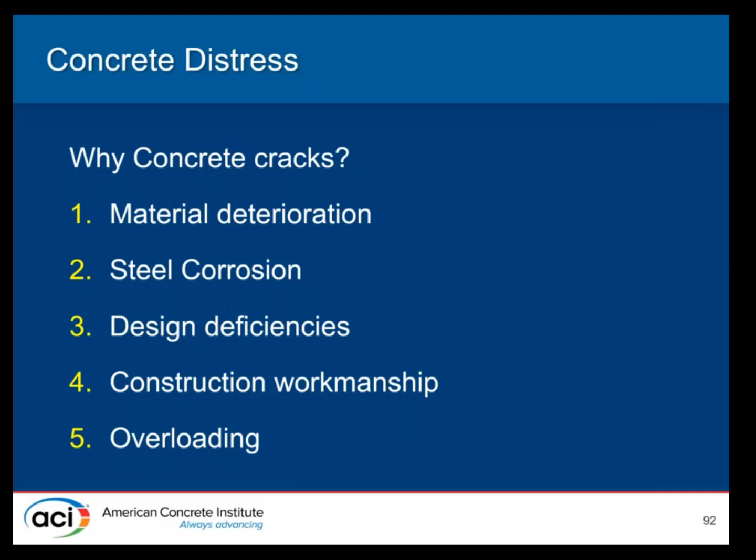In the next couple of slides, we're going to provide an overview on some of the types of cracks that an engineer may see in the field and try and give some idea of what they mean. These are just a few of the many types of cracks that you will see in a reinforced concrete structure, but we want to give you an overview of these so you can identify drying shrinkage cracks, freeze-thaw damage, volume change effects, alkali silica reaction, which is one of my favorites, and finally sulfate attack.

So drying shrinkage, as we all know, when we mix up reinforced concrete, we always end up providing a little bit more water in the concrete than is actually needed for hydration of the cement. That excess water is available, and that can evaporate, resulting in a loss of moisture from the cement paste, or drying. And when that happens, the constituent materials can shrink by about as much as 1%.

Now, fortunately, the aggregate particles provide restraint to that shrinkage and reduce the magnitude of the volume change to maybe something like 0.06 or 0.05%. On the other hand, when we expose concrete to water, it's going to increase in volume, and typically the volume increase can be the same order of magnitude as that observed due to shrinkage. Another thing that happens is restraint will be provided typically by another portion of the structure, or subgrade.

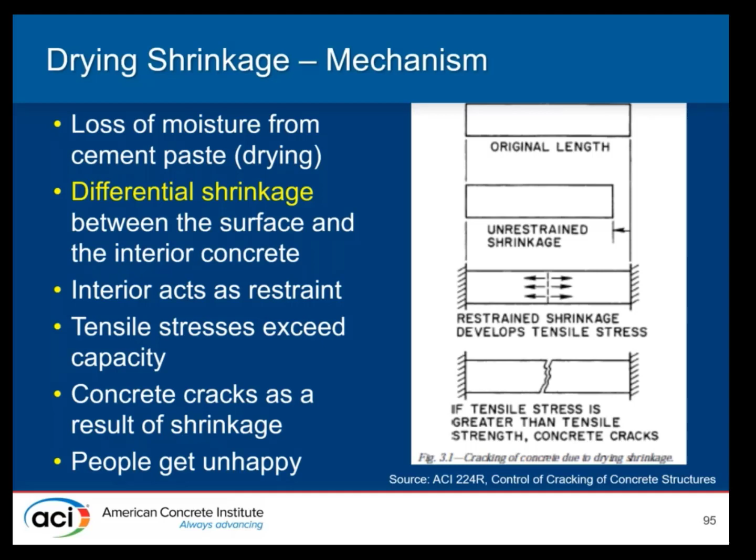Freeze-thaw damage: deterioration of concrete occurs once the concrete becomes critically saturated, which is approximately 91% of its pores filled with water. When water freezes to ice, it occupies 9% more volume than water, which is why ice floats. If there's no space for that volume expansion in a porous material, the water inside the concrete will freeze, causing distress, and you can get freeze-thaw damage.

You get this typical scaling pattern where the paste is actually popping off and the aggregate remains intact. So what does that look like?

What's the mechanism? In non-air entrained concrete, as the water, which is a weak alkali solution, cools, ice crystals form in the large capillaries. Osmotic potential develops and causes movement of water from unfrozen pores to the frozen ones. More ice forms until the cavity is full, and once it's full, cracking starts to occur.

So basically what's happening is this water wants to freeze, it's expanding, it's got no place to go, and eventually it pops the concrete. That's in non-air entrained concrete.

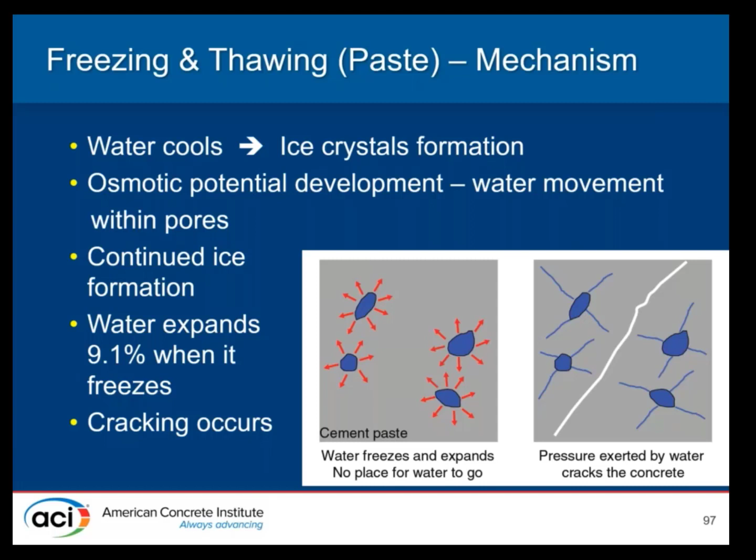If we have air entrained concrete, we specify an adequate amount of air depending upon exposure conditions and the size of the aggregate. The air voids provide space for the expanding water to move into, and that minimizes or prevents concrete cracking. This is the simplest explanation we can give for this.

So if we have adequate curing and drying before the first freezing cycle, we have air voids inside the concrete. Water can move into those air voids and finds an escape path there, providing basically a relief valve or spot for the water to freeze into. So when it's exposed to freezing conditions, it doesn't crack.

So what do we want to do? We want to use the lowest practical water-cement ratio and design an appropriate amount of air based upon the exposure. If you look in ACI 318, you can find a discussion of exposure categories F0, 1, 2, and 3 that will tell you how much air is necessary in the concrete to prevent damage.

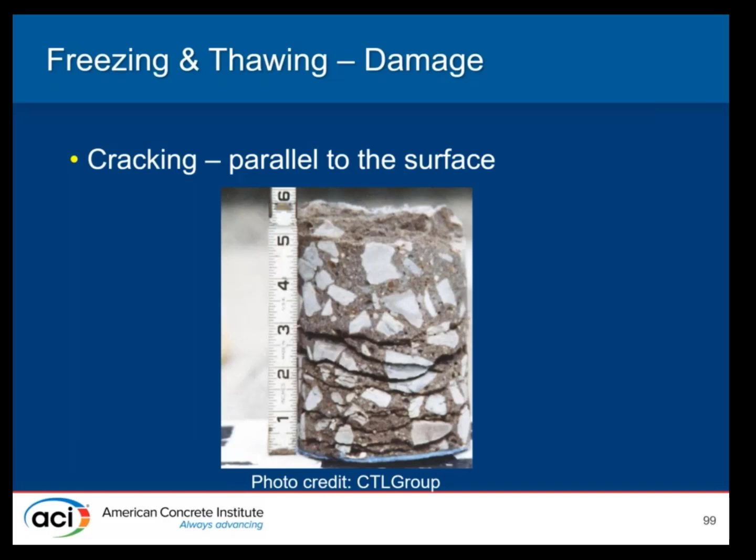So what does it look like? That's the more important question. The typical failure pattern in non-air entrained concrete—remember, the water is expanding inside the paste—as that expands, we typically get cracking parallel to the surface, as you can see in the slide. This occurs after the paste has become saturated with frozen water.

Some of the aggregates that may be prone to freeze-thaw damage when critically saturated are cherts, clay-bearing limestones, and some of our lightweight aggregates.

So that's freeze-thaw damage. The other problem we have is volume change as a result of shrinkage or expansion. This can be thermal deformation, resulting from either heat of hydration in mass concrete or changes in ambient air temperature, which affects all concrete.

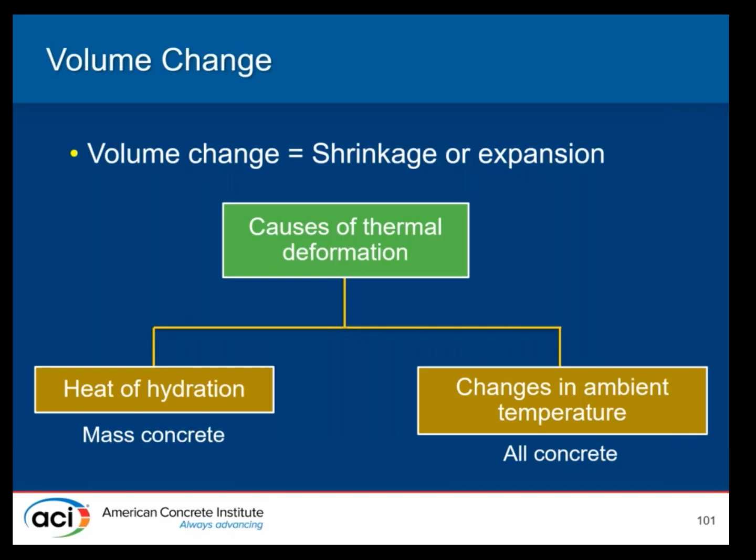Due to thermal effects, this will usually appear a couple days after stripping the formwork. Temperature cracks in pavements and slabs look very similar to drying shrinkage, and typically occur perpendicular to the longest axis of the concrete. They become apparent at any time after the concrete is placed, but usually within the first year or summer-winter cycle.

Because of thermal cracking, the hydration of cementitious materials generates heat for several days after placement. That heat dissipates quickly at the surface in thin sections and doesn't cause a problem, but in thicker sections, the internal temperature rises and drops slowly.

When the surface cools rapidly to ambient temperatures, there's a huge difference in temperature, and the subsurface contraction due to cooling is restrained by the hotter interior concrete that doesn't contract as rapidly. That restraint causes tensile stresses that can crack the surface concrete as a result of this uncontrolled temperature difference across the section. In most cases, thermal cracking occurs when concrete surfaces are exposed to extreme temperature changes rapidly.

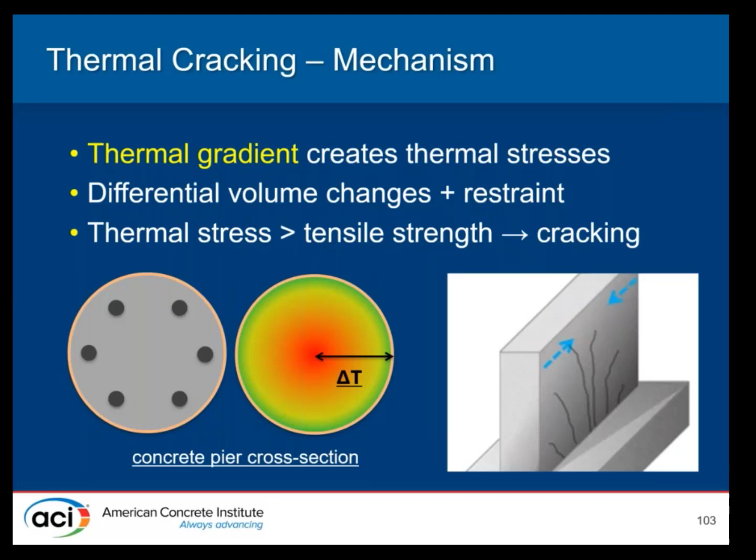To reduce thermal moments, we can use vertical formwork, keeping it in place to more slowly cool the top and exterior surfaces of the structure. Sometimes we can use different aggregates that have a lower coefficient of thermal expansion, like limestone, to have a little less expansion under these temperature changes.

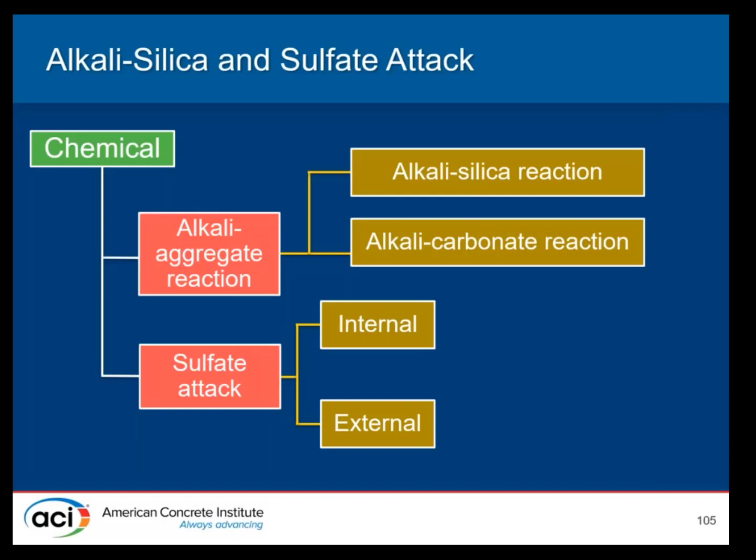Alkali silica reaction and sulfate attack are basically two different types of chemical attack. In alkali aggregate reactions, alkalis in the cement react with either siliceous materials or carbonates in the aggregate, and in the presence of water, those materials form gel products that are expansive and cause cracking. In the case of sulfate attack, we can have either an internal or external source of sulfate materials - they can be in the soil, in the water, or internally in the concrete - and those react with some of the Portland cement hydration products, causing expansive formation that also causes cracking.

The expansive reactions from ASR typically have a map cracking or alligator pattern, and that's a result of the expansive reactions at the aggregates causing that popping to occur.

So what does that look like? The ASR gel is typically a white deposit, efflorescence-like. In unrestrained concrete, the cracks will develop into a random pattern, commonly called map cracking. Restraint cracks tend to run parallel to the direction of restraint, or parallel to the reinforcement, or vertically in a column, and the cracks may exude that white gel we mentioned - white deposits. Pop-outs may occur where individual pieces of aggregate have expanded and disintegrated beneath the surface.

Typically ASR reactions take time - in most structures it's a couple of years after casting, but it could be earlier with some aggregates, and with other aggregates it may not appear for 40 years.

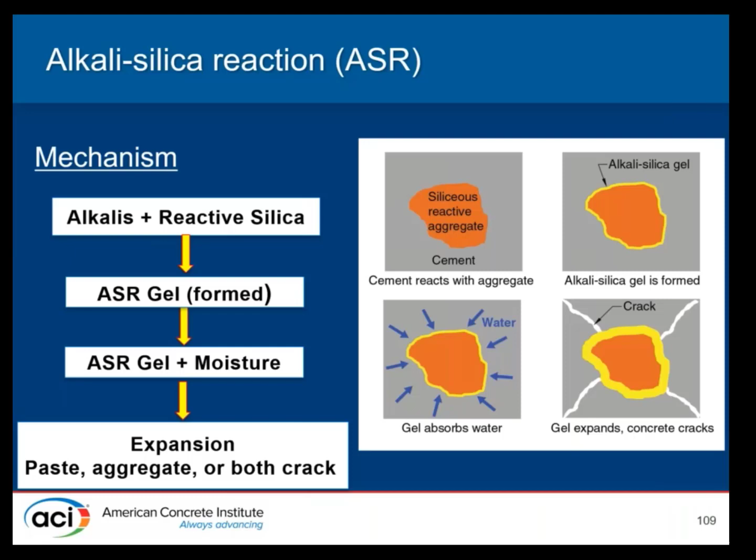So let's talk a little more about sulfate attack.

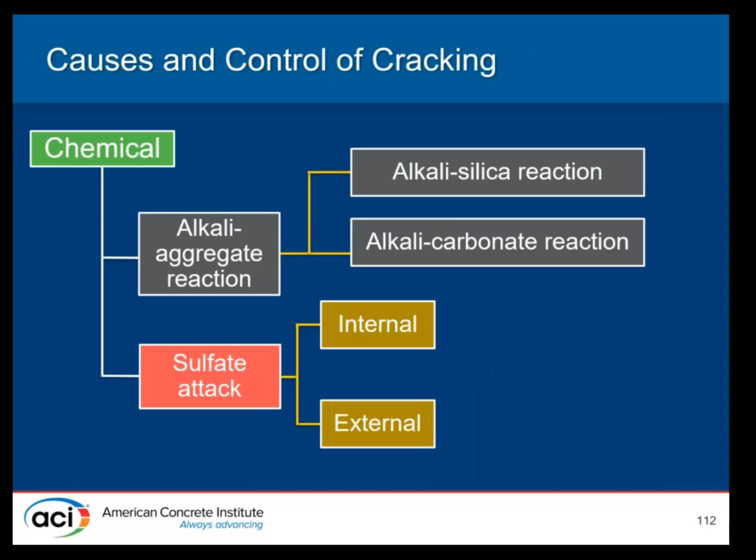Sulfates in the soil or water combine with tricalcium aluminate in the cement. They produce ettringite, which causes expansion and deterioration.

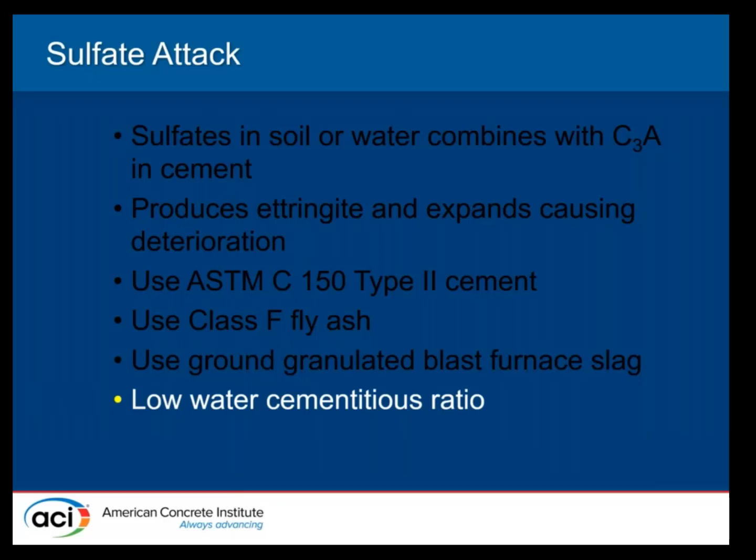To prevent sulfate attack, you can use a type 2 cement, or these days it'd be a type 1L cement. You could add in a class F fly ash, use a slag, or drop the water cement ratio to make the concrete a little bit less permeable and less prone to water infiltration. So what does this look like in some of the pictures?

The deterioration of the concrete results in basically complete disintegration. All your paste breaks apart and you've got nothing left but a pile of aggregates. It turns to mush. The rate of reaction is a function of how much sulfate is present, how much water is present, and then ambient temperature and humidity.

The concentration and the type of sulfate that's present also matter. Sulfate attack can be minimized by decreasing the water cement ratio so the concrete's a little bit less porous, minimizing cracking so we're not giving a path for the nasty water to get in, and then selecting appropriate cement and other cementitious materials.

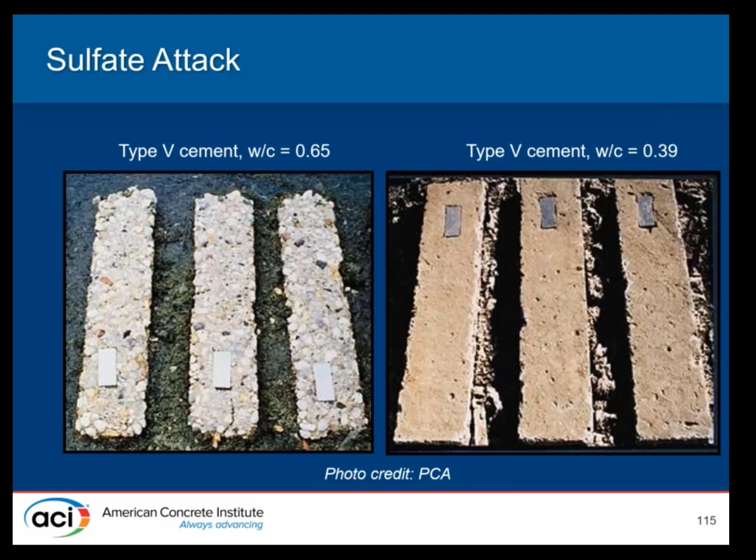Corrosion. I've probably spent more time investigating corrosion damage than anything else. It's the number one cause of concrete failure, costing as high as $468 billion. And that does not include the loss of revenue—that's just the cost for doing repairs.

So what's going on? What's causing this damage? Reinforcing steel in concrete is protected by a high pH layer that forms on the reinforcing steel. As long as that protection is present and the concrete's nice and dry, the reinforcing steel is not going to corrode. What happens over time is chlorides will penetrate into the concrete and break down that high pH layer.

Once that happens, once sufficient water and oxygen are present, we'll start to get corrosion, and eventually, once the reinforcing steel expands sufficiently due to corrosion processes, we'll get cracking. We start to see more expansion, and eventually we form delaminations and spalls in the concrete.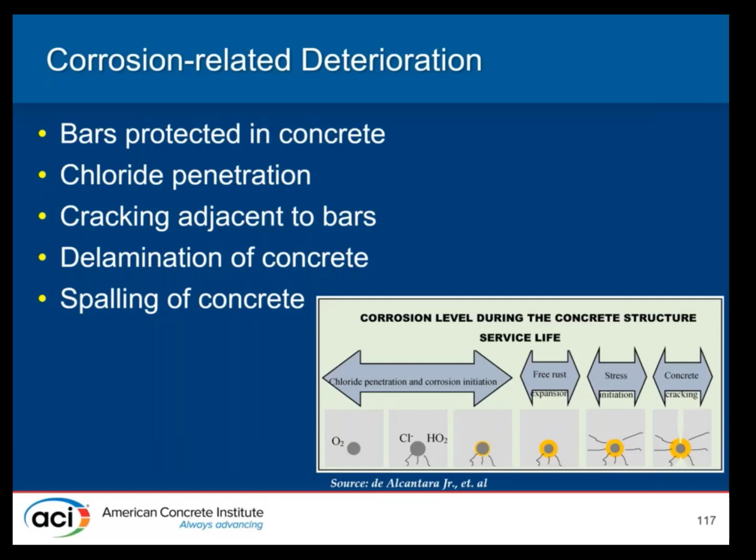Some of the factors affecting corrosion are the quality of the concrete—how impermeable is it? How much cover is present—is it 3/4 of an inch, or is it 1.5 inches? What's the moisture condition—is the concrete saturated, is it draining properly, is it in a tidal zone, or is it someplace where it's going to stay clear and dry?

Temperature—obviously, being a chemical reaction, the higher the ambient temperature, the higher the rate of corrosion. A combination of chlorides and sulfates can get together and cause even more damage, where the chlorides attack the reinforcing steel and the sulfates attack the cement. Oxygen also needs to be present.

For most cases—though there are situations where corrosion can occur in low oxygen environments, and that's a little bit more complicated, we're not going to talk about that today. The so-called microbial-induced corrosion can occur. There's also the process of carbonation, where CO2 from the atmosphere reacts with the Portland cement to decrease the pH, which also leaves the reinforcing steel susceptible to corrosion.

Concrete has a naturally high pH. We're not going to get deep into the chemistry here, but that means the concrete is alkaline, the opposite of acidic. Steel naturally has a reaction with the alkaline environment of the concrete that forms a protective layer on the reinforcing steel.

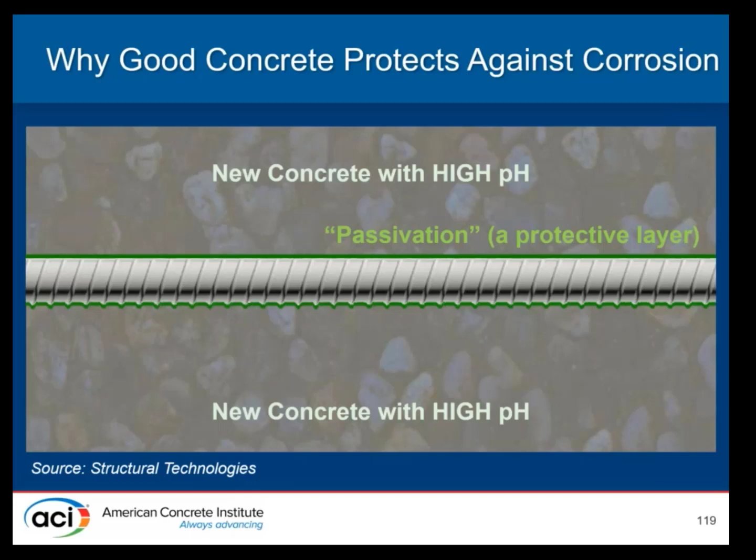Unfortunately, there are contaminants that can lower the pH of the concrete. When this happens, the concrete no longer maintains that passivation layer, and corrosion can start. The two most common contaminants are carbon dioxide and chlorides. There are two main disruptors to the passivation: chlorides and carbon dioxide.

Let's look at exposure to carbon dioxide and moisture. This is the process in which carbon dioxide lowers the pH of the concrete. It's called carbonation, and carbonation occurs when the CO2 reacts with free calcium hydroxide in the concrete to form calcium carbonate.

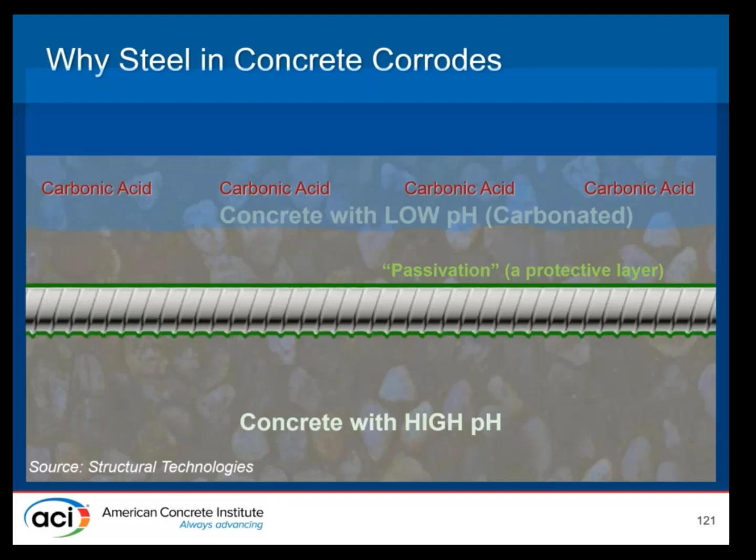That CO2 enters into the concrete and reacts with the water, forming carbonic acid. That acid, along with the reaction of the CO2 with the calcium hydroxide, acts to decrease the pH of the concrete.

The level of the depth of penetration increases over time. So once you see initially the concrete protected, over time it's going to reach down into the level of the reinforcing steel.

Once the passivation layer is disrupted, corrosion can start. In a normal environment it's a very slow process, typically taking 25 years for carbonation to reach reinforcing steel with 1 inch of cover. However, in situations with a high CO2 environment, like highway tunnels or industrial facilities, that concrete may carbonate faster.

The other thing that happens is chlorides, water, and oxygen penetrate into the concrete as well, and the chlorides act to destroy our passivating film. So the time to corrosion is a function of the steel cover depth and the concrete quality. The second way that passivating layer gets damaged is by chlorides and moisture.

Chlorides come from a lot of different sources. They can be from salt water, de-icing salts, industrial processes, or from the original concrete mix, either as an intentional admixture—which is not permitted anymore for structural concrete, but has been common in the past—or as impurities in the water or aggregates used in the concrete mix.

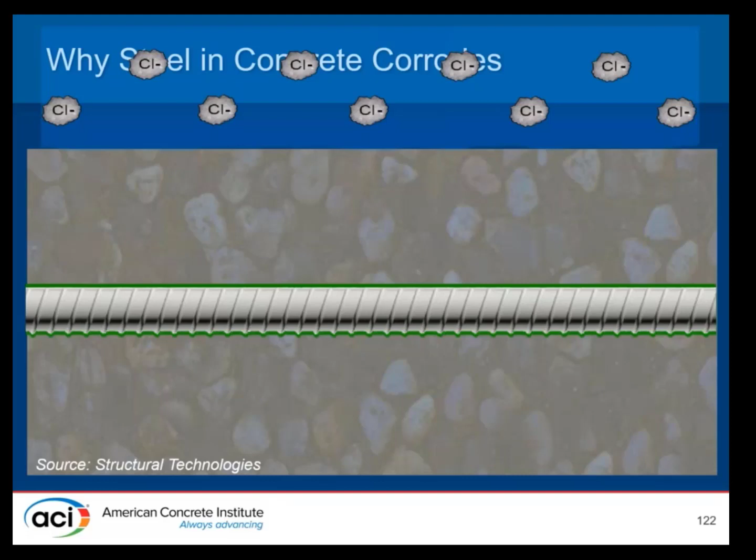So the chlorides ride into the concrete on the water, and they manage to saturate down to the reinforcing steel. As they get there, they eat away at the passivating layer. Once that passivating layer is disrupted, that leads to and allows corrosion to occur.

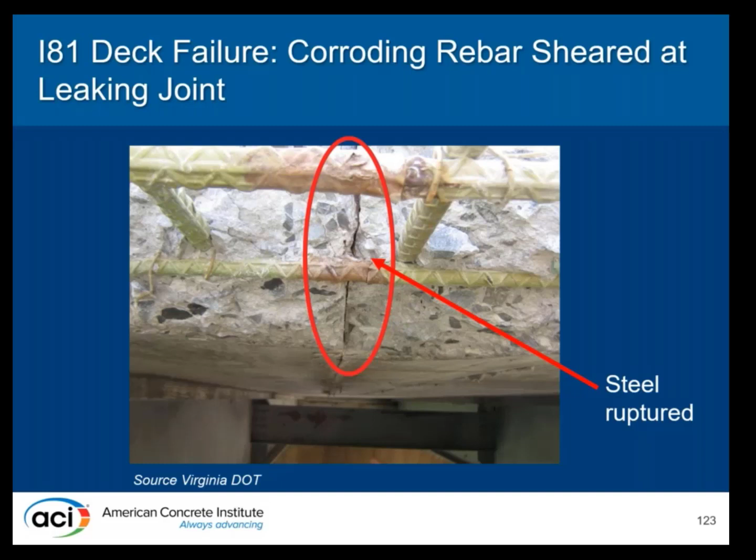So what can that look like? This is a picture from VDOT where there's very concentrated corrosion at a leaking deck joint. Actually, that concentrated corrosion led to the reinforcing steel shearing or rupturing at the deck, at the joint level.

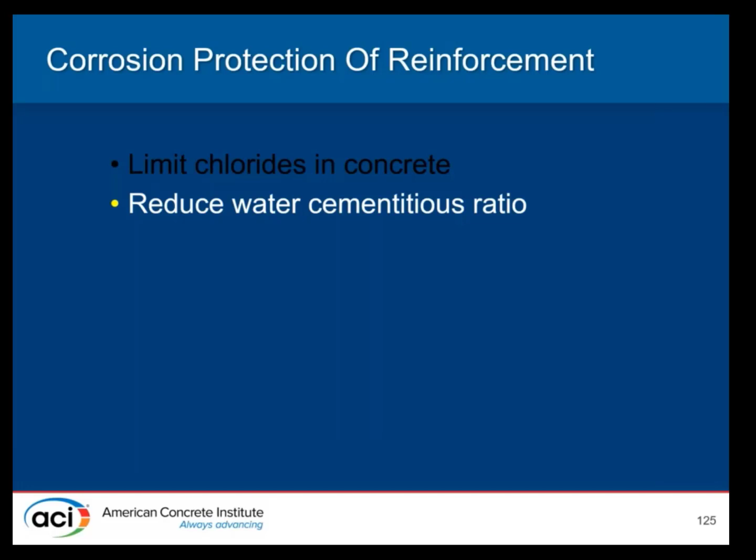How do we keep our concrete safe from chlorides and carbonation? Obviously we want to limit the chlorides in our concrete, so make sure we're not using things like calcium chloride as an accelerator, or that our aggregates are not accidentally contaminated. We also want to reduce the water-cementitious materials ratio to create a less permeable concrete, so we're not allowing water in as freely. Adding fly ash, a supplementary cementitious material, also reduces the permeability of the concrete.

Same thing with slag, a ground granulated blast furnace slag. Silica fumes are another way to decrease the porosity of the concrete. There are also corrosion inhibitors. So we've talked about some of these damage mechanisms—now let's talk about some design defects.

Things can be under-designed, so there's inadequate strength, improper detailing, or a lack of expansion or isolation joints so the structure can't deform.

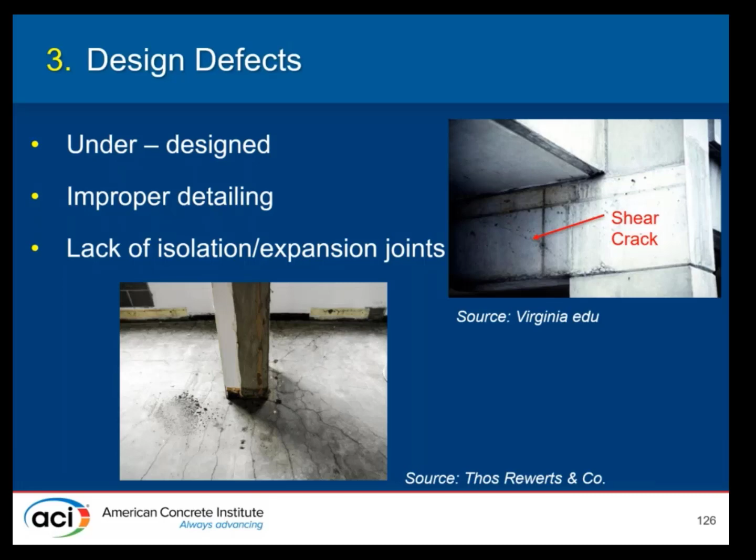Bottom left is a punching shear issue, I believe, at a column. And up at the right, there's a reverse shear crack in a concrete girder.

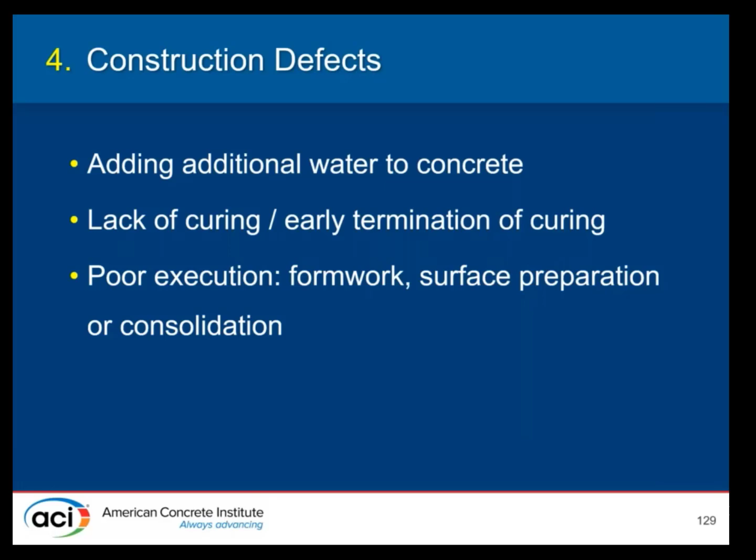Some types of construction defects that may cause damage to a structure: additional water in the concrete, which decreases strength and increases the potential for shrinkage; a lack of curing or early termination of curing, which can lead to cracking; and poor execution - formwork, surface preparation, and consolidation issues.

So what's supposed to happen? Concrete, when placed, is consolidated using concrete vibrators or vibration. The vibrators liquefy the mortar fraction of the concrete to allow it to flow, dropping the internal friction between the aggregate particles. It's a two-stage process - when you vibrate the concrete, it slumps down and flows, and then there's deaeration of the mortar. When you stop vibrating, the friction between the aggregate particles comes back.

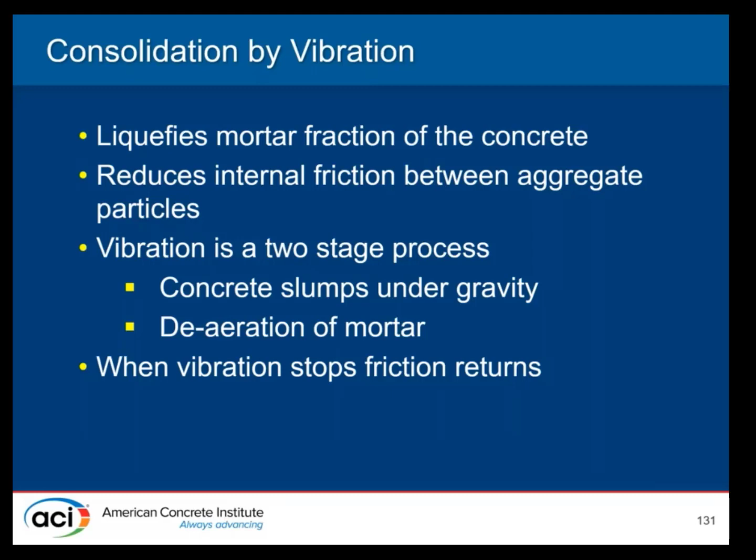So what did that picture look like when they tried to place concrete in it? Vibration only works if there's actual space for the concrete to go. If you have a wall of reinforcing steel with no space for the concrete to pass through, it's not going to work, and you'll end up with something like this, which obviously needs to be replaced.

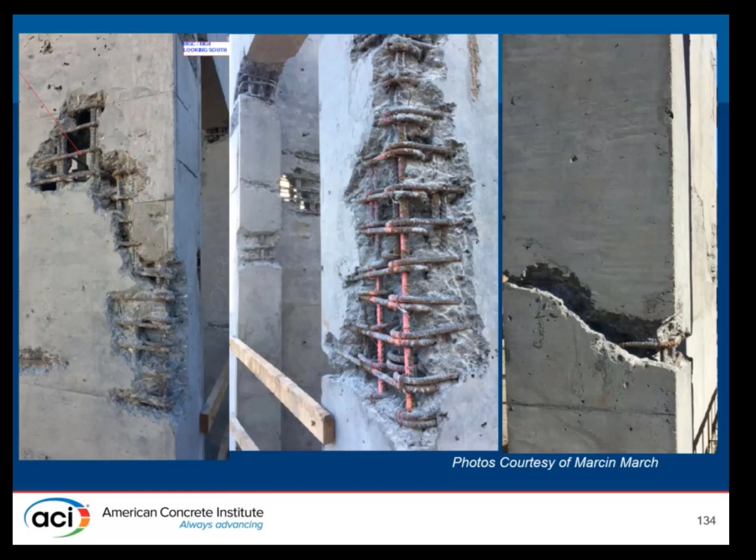Let's see some more close-ups - some situations where there's been inadequate vibration, inadequate consolidation of the concrete itself. Here, they tried to get the concrete to flow underneath a void in the formwork, and it didn't quite make it all around.

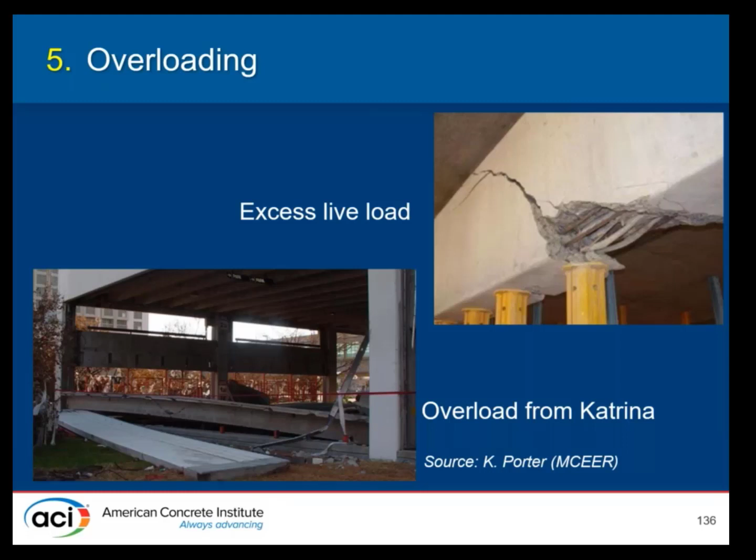Different types of overloading can occur and damage a structure. The overload in the upper right picture was an excessive gravity load that basically failed the beam and needed to be shored immediately because it was about to collapse. The lower left corner was a more atypical one - this was a result of flooding during Hurricane Katrina, where the flood waters moved through and popped that panel off the concrete structure.

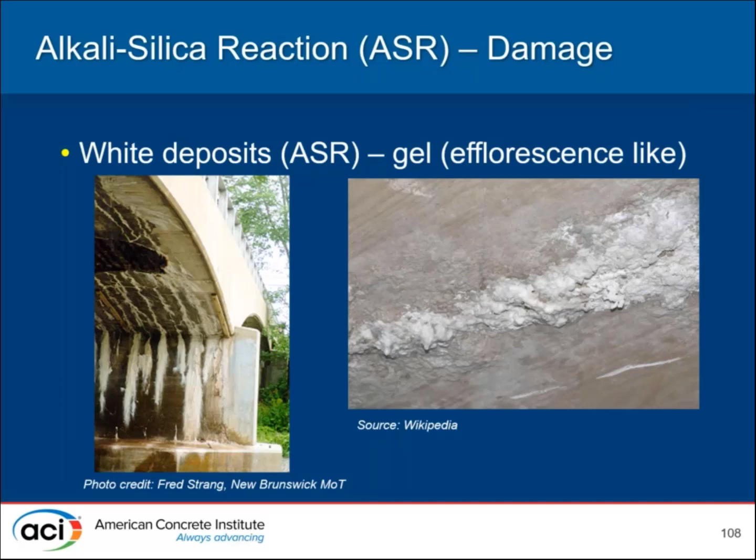Okay, now a non-specific slide question. Is preliminary assessment required or recommended on all repair projects? To me, I always think there's going to be a preliminary evaluation as part of the process. If you chose to, you could go straight into a more detailed evaluation process. It's really a lot of how you approach a project, and so much of this is dependent upon what type of structure you're dealing with, if you have some indication of what the damage is present, and what sort of information you have about the structure.